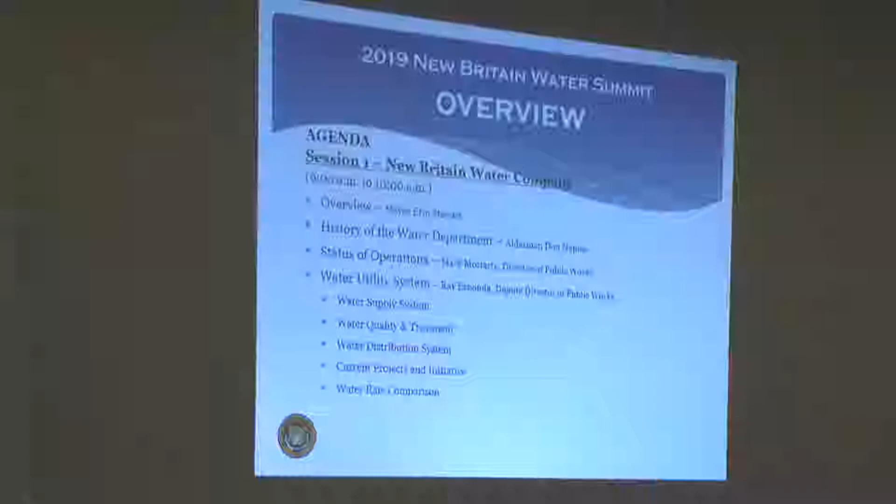I'm going to quickly hand this over to Alderman Don Naples. He's going to talk about the history of New Britain Water. The agenda today consists of Don Naples talking about history first, then I'll give a brief status about where the department's at right now, and Director Ray Esponda will go through and talk about the water asset—our distribution system, our water supply, the whole comprehensive water asset. Second part of the agenda, I'll talk about the sanitary sewer system, briefly hit on the storm system, and then Michelle Ryan from Mattabesset will talk about the Mattabesset District. There's probably a misconception that New Britain Water is just New Britain Water—it's actually New Britain Water Sewer, and they handle all of the city's underground utilities. So with that, I'm going to turn it over to Alderman Naples.

Thank you, Mark. Hope everybody can see what's going on here. We just set this up a little different.

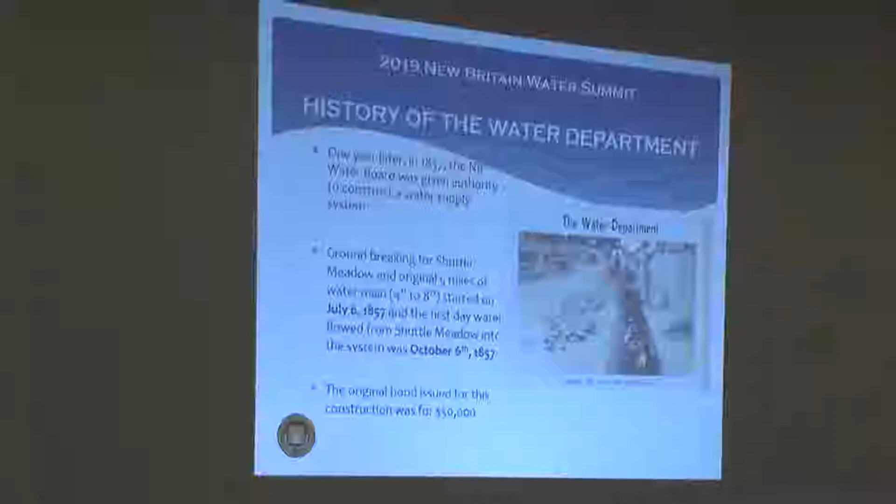The water department goes back to 1856. Our first mayor, Frederick T. Stanley, had a study performed about the feasibility of securing a water supply for the city. One year later, the water board was given authority to construct a water supply system, and the groundbreaking for Shuttle Meadow and the original 5 miles of water main happened in 1857, the next year. The first day water flowed from Shuttle Meadow into the system was October 6th, and notably the original bond issue for this construction was $50,000—keep that number in mind. It was 1857; that was a lot of money back then.

So the water department was founded in 1857. The town population at the time was 4,500, and in 1868 was the first reported water shortage because of rapid population growth. By 1910, the population was already up to 43,916.

In 1891, a new dam added 10 feet of height to the Shuttle Meadow Reservoir, bringing its capacity to 1 billion gallons. Then in 1910, it was raised another 4 feet, up to 1.1 billion gallons, where it is today.

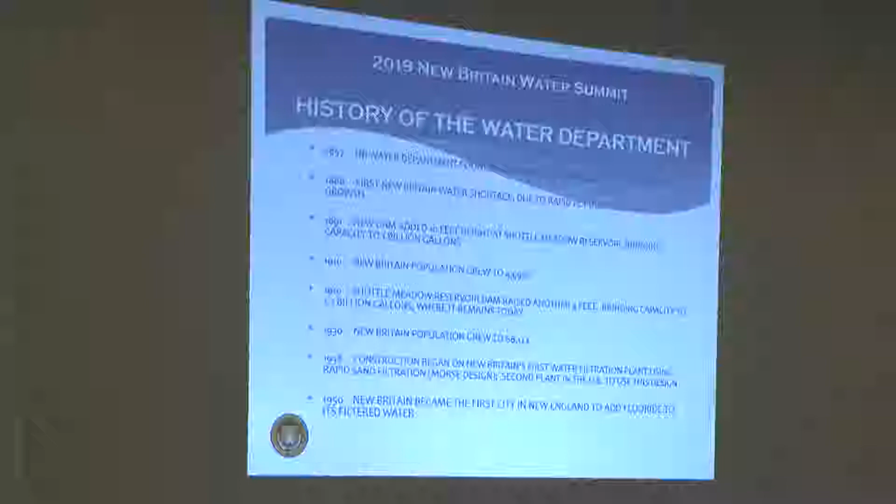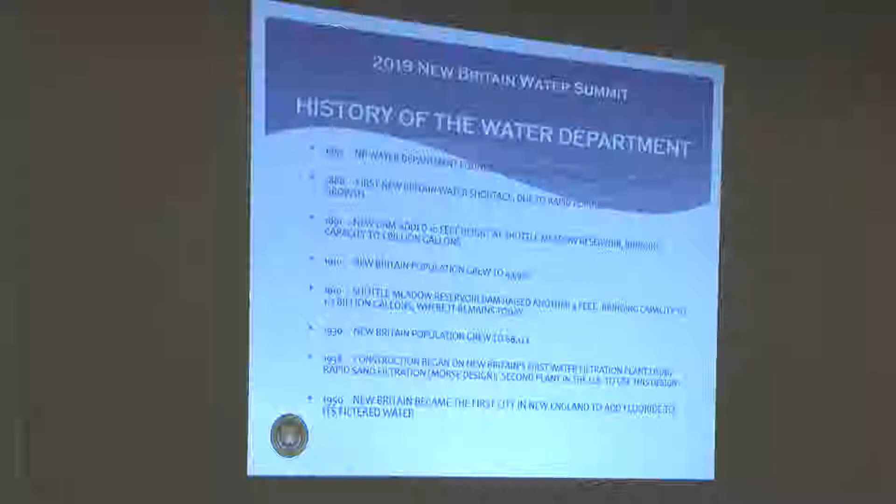And that particular day, big day in my life, because it was August 19th, 1938, and that's the day I was born. So my father, who was working for the water department, apparently didn't show up for that picture that day. He came to work right out of college in 1929 and finished up running the department in 1969, 40 years. So I got a little family. I think that's why I was asked to do this.

But that filter plant, I remember the only place they could find the fine sand they needed was from Cape May, New Jersey. They had to truck it up here whenever they needed it. 30 years later, I was in the Coast Guard. I was stationed in Cape May and learned a lot about that fine sand because it's so fine it gets in everything. It gets in your car, in your house, in your teeth. But there was no sand like that, and it was very good for this application.

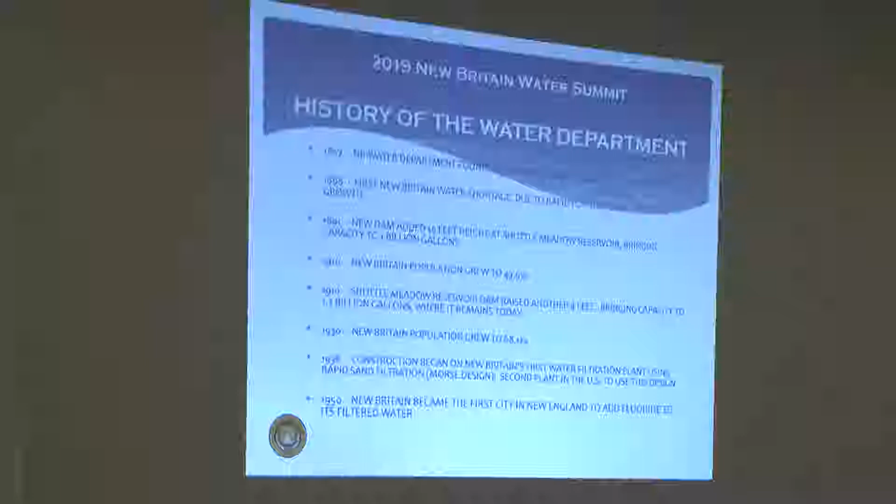So in 1950, another big event happened. New Britain was the first municipality in New England that added fluoride to its water. And there was no vote on it. There was some controversy at the time. The New Britain health inspector had been reading about people in the southeast U.S. They had fewer cavities there. It was because the natural water that they drank had natural fluoride in it.

So the group got together and decided, yeah, that would be a good thing to do. We'll put 1 part per million in. Now it's a big deal whenever anybody wants to do anything. But New Britain was first in New England, and the local history room sent me an article that was in the Hartford Courant chiding Hartford for not being progressive like New Britain was.

So in 1960, our population was up to 82,000. Population kind of floats through here. We got to 95,000 in the mid-60s, and we're at 73,000 today. So that has a lot to do, that and the factories, with what we use. So in 1961, there was another filter plant section added, the B plant. And so our total filtration capacity went up to 25 million gallons a day.

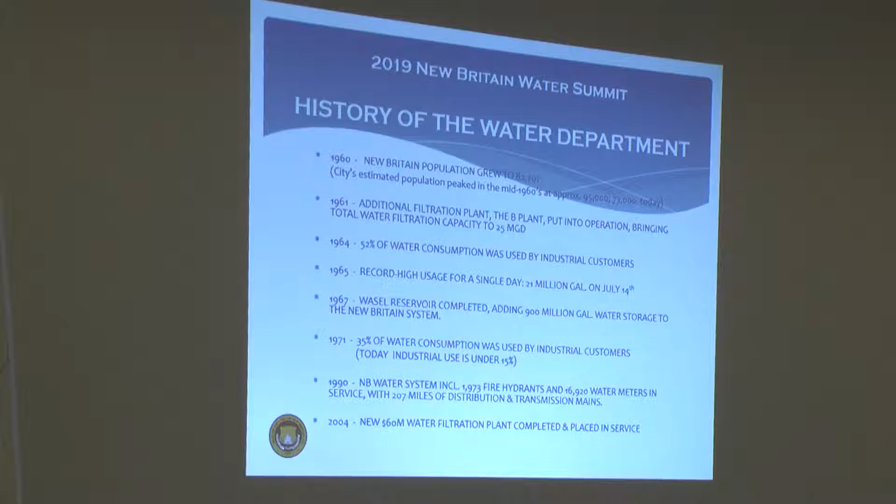2004, a new $60 million water filtration plant went in. Remember the original one was $50,000. My dad said that had a life of 50 years, so it lasted 66 years, which was pretty good.

Interesting fact, the Wasel Reservoir was named for New Britain native David Wasel. He was a Navy submariner who, when the Thresher went down, was lost along with the whole crew in 1963. Until then, the original name of the reservoir was Panther Swamp, so this is a lot better. Nice name. It's a better name now. Yeah.

Should mention back on the fluoride thing, I didn't have any cavities until I left to go to college, and then got 4 in the 4 years that I was there. So this is it for me, and I did it in under 10 minutes.

You did a good job, Don. Yeah.

Okay, I'm just going to get you up to date on where we are as a department right now. Don's presentation ended pretty much in the history of the water department in 2004 when the treatment plant was done. I have a little bit of history in the past few years since then.

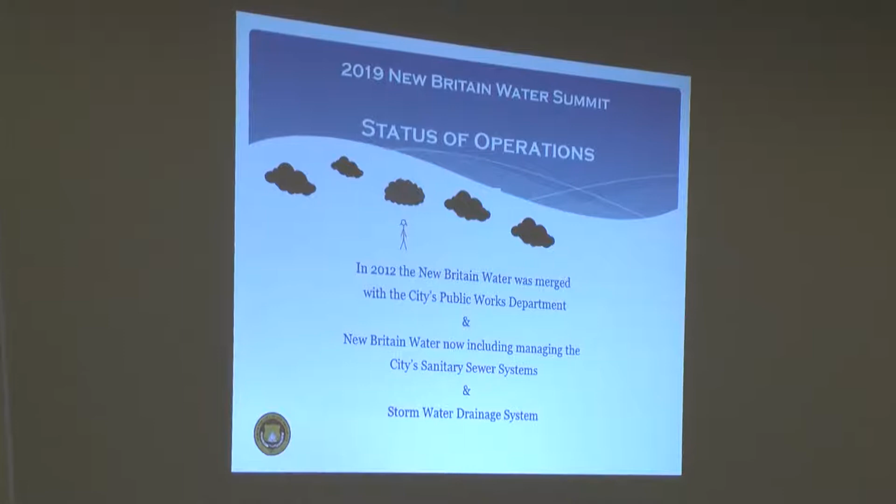For the first 155 years of its operation, New Britain Water was moving along just fine, doing a good job. They had just built a treatment plant. 2012 got thrown a little bit of a kink. Ray and some of his guys might say it was a black cloud day in New Britain Water, but it's actually been a very productive thing, a great thing for the city because we achieved a lot of savings by merging operations.

In 2012, we merged all of our utility operations under New Britain Water. Our sanitary sewer system and our storm water drainage system, all the staff and equipment that went along with that, came into New Britain Water. It was a good move because under public works, sanitary sewer was just managed as one of our functions, but New Britain Water really manages underground utilities. So it was a smart move, and it's one we continue to make progress on.

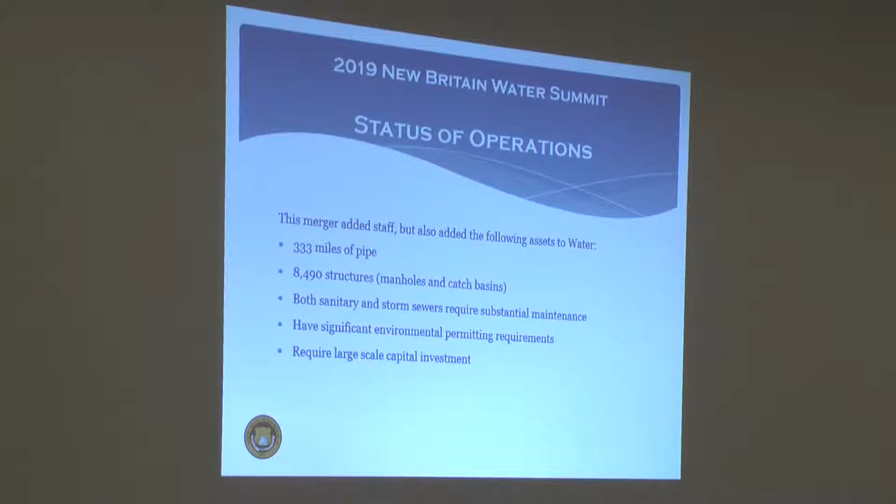This meant a few things for New Britain Water: added 333 miles of pipe under their management, and almost 8,500 structures between manholes and catch basins were added for them to oversee. Both water and sewer utilities have heavy permitting requirements, a lot of deep permitting and work we have to do just for compliance. Especially on the sanitary sewer side, there's massive capital investment required, which I'll get into more in the second half of this presentation. Sanitary sewer has a lot of capital projects to do.

It's been successful to date. Ray and I are joined at the hip. I spend more time with Ray than my kids or my girlfriend. For all the time we spent together, I'd say we generally like each other.

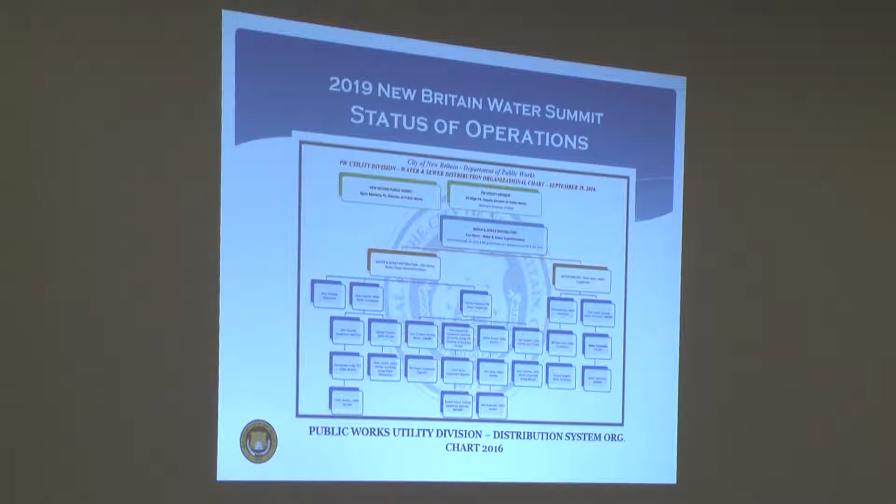When New Britain Water first came into public works, it was actually a pretty easy task for me. It came with a full management team, Gil Bly was there, so it didn't really require a heavy lift on my part. Then 2016 happened. Going into 2016, the org chart was pretty solid.

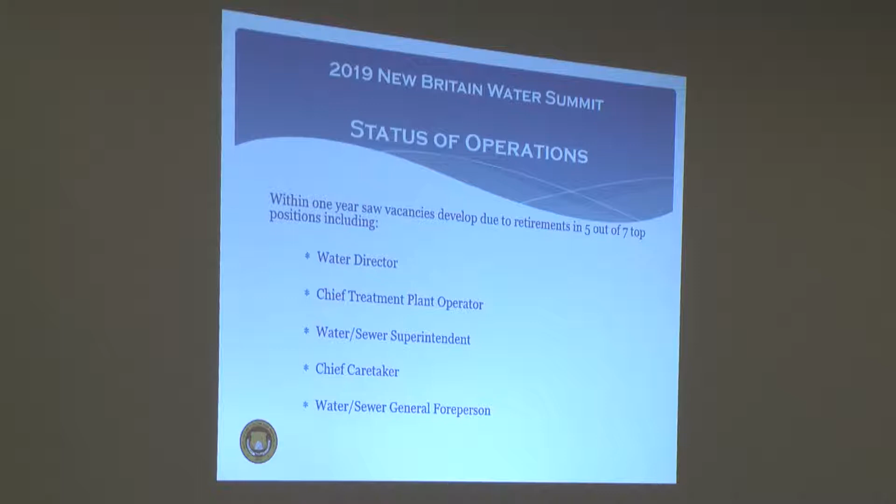Within that year, we lost 3 of the top positions in utility operations, on the distribution side and the water quality side, by the beginning of 2017. Similarly, we lost a number of our top positions during the course of 2016. Overall, in 2016, 5 of the top 7 people were lost through retirement: the water director, Gil Bly, our chief treatment plant operator, water sewer superintendent, chief caretaker, and water sewer general foreperson. We lost basically all of our people.

And we did this at a time in 2016 when we were faced with the worst drought since 1960 - Shuttle Meadow Reservoir was at 20%. At the same time, on the sewer side, we were faced with a consent order from EPA that we had to negotiate. It's a CMOM order, basically, and it spoke to how we had to manage our sewer and the investment we had to put into it moving forward. These were probably the 2 most difficult things we'd faced in years on either the water or sewer side, and we were doing so with 5 of our top 7 people gone.

Fast forward a few years, I gotta say, we not only got through those things, we negotiated the CMOM order favorably, which was a difficult thing to do. We got through the drought, and thankfully the weather turned around. This year has actually been one of the wettest on record, and we've been operating pretty close to 100% for quite a while now.

Our new leadership team at Water consists of Ray Esponda as the lead - he's Deputy Director of Public Works and runs the water and sewer operations. James Richardson is Chief Treatment Plant Operator, sorry about the typo there. Chris Bolkowski has been in charge as Superintendent of Water Sewer.

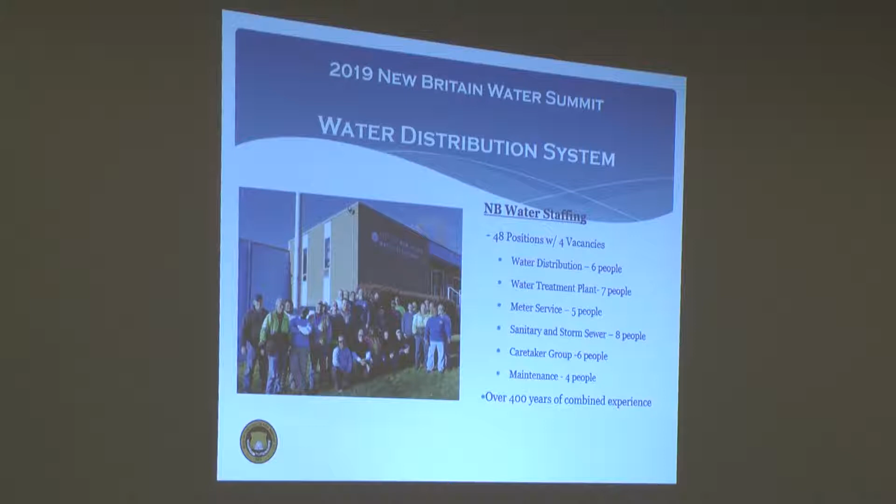The good thing about the reorganization, what it brought together, is it gives more people - when you have an emergency, like a water main break, we can draw from sewer guys, we can draw from water guys. They can work together, and they all have experience doing this now.

The rest of the presentation, Ray's going to get into our water asset, the distribution system. We have a great map over here about our water supply. This map really covers everything, but it covers our water supply system.

We're going to try not to get too in the weeds. This is technical stuff, it's water. We're going to try to keep it high level and informative for you. Some of it gets a little technical when talking about water treatment plant operations, so bear with us if we get technical. Ray does a hell of a job keeping things entertaining and moving along, so you're not going to have to worry too much about that.

Okay, Ray. Thank you, Mark. Mark, it has been a pleasure working with you for the last 2 years. And you can pay me later.

I've been here since the construction of the plant. I started in 2001. When I first got here, Gil Bly interviewed me and refused to show me the old plant - that's how bad it was. It had gone 16 years past its useful life.

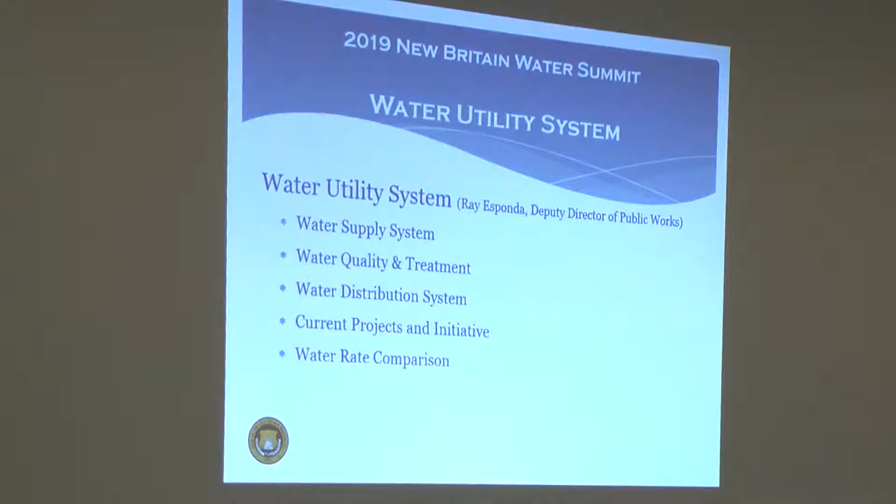But I've been blessed to work with the foresight of the prior overseers of the water department. There were some really brilliant people at one time. They made some great decisions - buying the land, locating the plant, putting the assets where they needed to be. Fantastic work. I actually stand on the shoulders of giants.

Don's father did some incredible work. Getting the Wassel construction done, it was amazing.

So I'm going to just go over the basic water utility system. I'm going to go over the supply system, quality and treatment, which is my forte. We're going to discuss the distribution system, some current projects and initiatives, and of course we're going to talk about our rates as compared to others in the area.

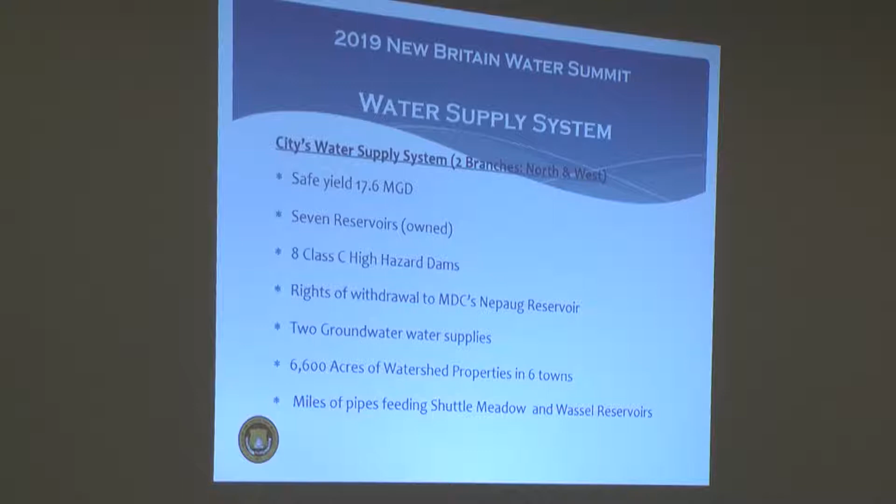All right, the city's water supply has a safe yield of about 17.6 million gallons a day. That's the water we can get from our reservoirs. We have 7 reservoirs. The furthest one away is the Whigville Reservoir. We have the Wolcott Reservoir.

We also have the rights, which I had to utilize for the first time since the 1960s, to withdraw water from the Nepaug Reservoir, which is owned by the MDC, all the way up here. That pipeline is our system. We have 2 branches of supply: the Western system, which comes from Wolcott all the way to Wassel, and the Northern system, which goes from Nepaug to Whigville all the way to Shuttle Meadow. From these 2 reservoirs, we draw water into our treatment plant.

We also have 2 groundwater supplies, and the future for the New Britain Water Department is those groundwater supplies. We have the Patton Brook, which we just got back from Southington about 3 years ago, and we have plans in place to utilize it. The first time that water actually came to New Britain was about 1.5 years ago. We reconnected it to our system, and we were able to draw limitedly into our Shuttle Meadow Reservoir. It's connected to our Western system, but because of the aging pump and the way it was originally designed, it was intended to go into Shuttle Meadow, not into Wassel. The pumps aren't set right, and we have to do some work out there.

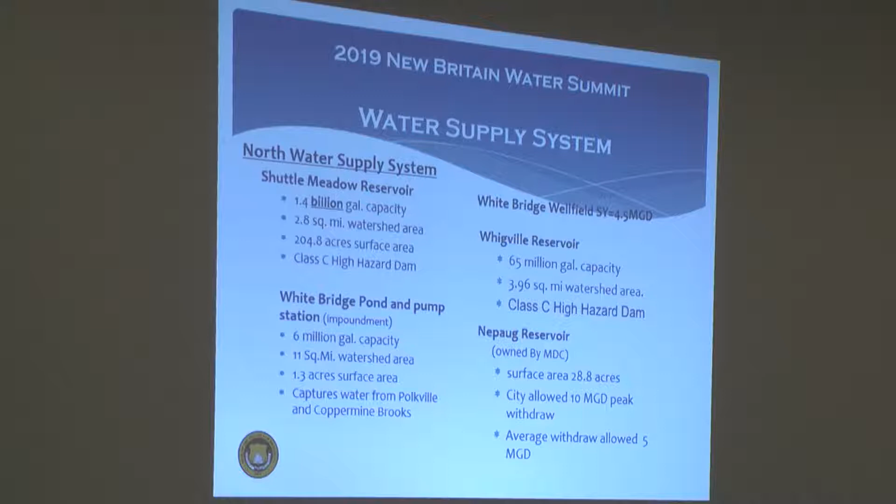Okay, our northern supply consists of the Shuttle Meadow Reservoir, which is our largest, with a huge capacity, 1.4 billion gallons. We also have the Whigville Reservoir, which is up here, a tiny reservoir in an incredibly large watershed. If you looked at it from a map, it's almost like looking at a thimble inside of a blanket. Incredibly large watershed. We also have the White Bridge Pond and Pump Station. We have a pond where we get surface water, but we also have 32 wells out there, very old wells that really need to be redeveloped. And we're working right now on a study to see if we can actually make that a potable water supply.

Then we have our Western system. Our Western system consists of the Wasel Reservoir, which is almost 1 billion gallons. The major concern with the Wasel Reservoir is that it's a great storage reservoir, but it doesn't have a lot of watershed on its own. So it's really dependent on the Hart's ponds, which would have to be pumped to that reservoir, which can be quite expensive. But we do have the Wolcott Reservoir, which was originally intended to fill Shuttle Meadow, but back in the 60s, we created a new pipeline to feed the Wasel Reservoir from that. And now we have the addition of the Patton Brook well, but again, limited use of it. I can take the Patton Brook well and pump it to Shuttle Meadow and get 1 million gallons a day. But if I pump it to Wassel, I get less than half of that. It needs to be worked on significantly.

This is our treatment scheme. Our new treatment plant was built in 2004 and put online. I came in 2001 to help oversee the construction of it and make sure that the chemistry would work properly. We can take water directly into this plant from Whigville if we need to, but being a small reservoir with such a large watershed, the water quality, the term that we use in the water treatment business, is flashy. On a nice steady day without any rain, the water quality is good, but if we start getting rain out there, being such a large watershed, the water quality drops significantly. We can also take our water directly by gravity from the Wasel Reservoir, and we pump it from the Shuttle Meadow Reservoir into this building.

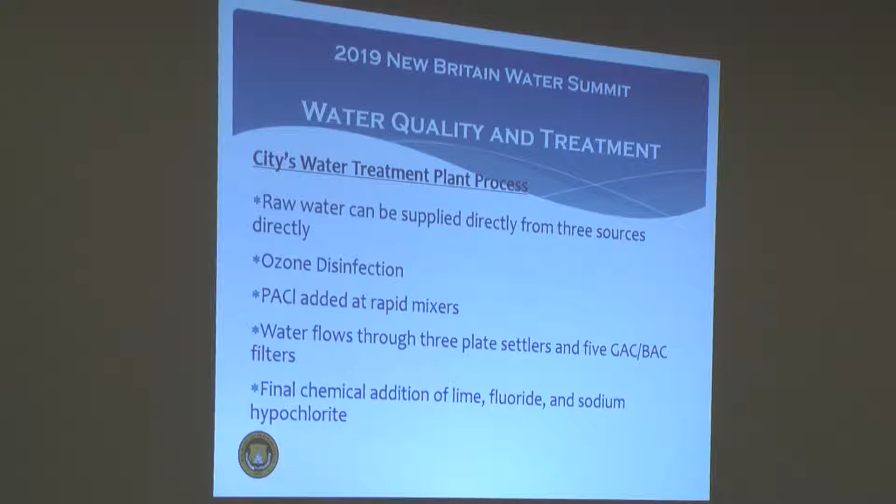And then we use sodium hypochlorite, which is chlorine, to maintain that our distribution system is free from any sort of contamination by bacteria or viruses or any protozoa. This is a basic scheme of our plant. We have the 3 sources that come in. We hit it with ozone, and then we clarify the water by adding that coagulant. It goes through our flocculation, then through our plate settlers, and then it gets filtered out.

And on the way out, we hit it with lime, with fluoride, sodium hypochlorite. We have the ability to add carbon dioxide. Because we ran into some issues when the plant was put on, we've eliminated that, and we use a high pH scheme to control our corrosion.

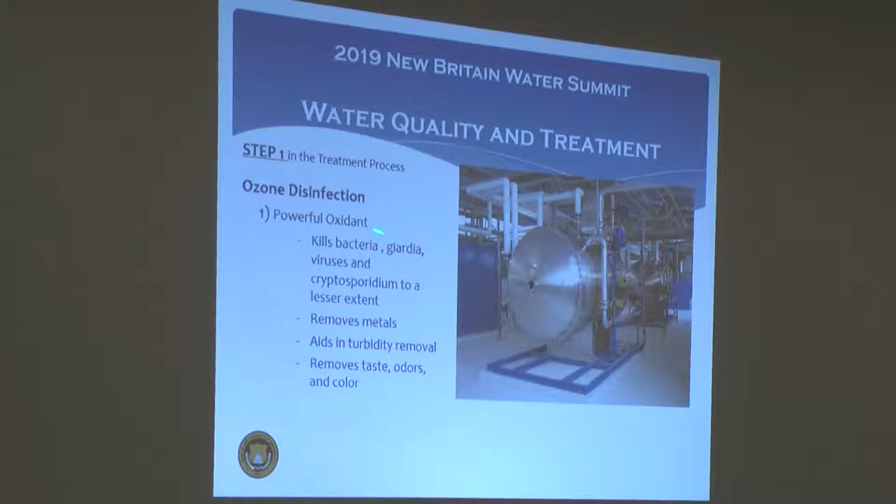This is an ozone generator. Very expensive piece of equipment, but it gives us some great ability at this treatment plant. Not only does it kill bacteria, giardia, and other protozoa, it controls cryptosporidium. Cryptosporidium in the 1990s was responsible for the Milwaukee outbreak, where 400,000 people got sick. Almost the entire population of Milwaukee got sick because of cryptosporidium. And with that occurring, there was a whole new set of laws that came through.

One of the other benefits of ozone is it oxidizes metal. It's oxygen. It's basically oxygen. And it also helps in our turbidity removal, and it does bleach out taste and odor compounds and color compounds. So it's a really interesting and powerful chemical that we use. Again, our GAC is a very interesting process.

We use this media, and this media is fantastic because it can actually absorb organic pollutants from the water as the water is being filtered. This is a typical scheme of one of our filters, but these are the tiny granules of media in there, and all these fissures and cracks act as places to attract contaminants. 1 pound of activated carbon basically has about 200 miles of surface area, which we can attract all these

organic contaminants. They help remove VOCs, which are volatile organics, mostly like gasoline, toluene, things of that nature. It also removes SOCs, which are synthetic organics, pesticides and herbicides. So this is a really important step in our process. It also removes taste and odor compounds, which are also organic for the most part.

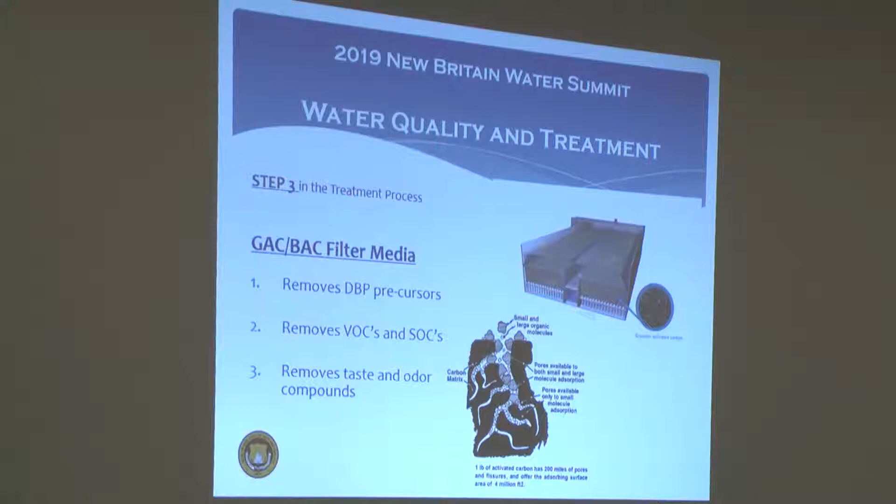We use a liquid. One of the changes that we went to when we had the new plant put online, we went from a gaseous chlorine system where we had these massive 2-ton cylinders of chlorine gas, which were quite dangerous. If we had a leak with one of those, we could have big problems. So we switched over to a liquid system, liquid bleach. It's safer to use, it's easy to use, and it provides a really good disinfectant.

The other thing that we changed, we went from aluminum sulfate to polyaluminum chloride, which was at the time a new type of coagulant. Uses a lot less alkalinity, so we don't have to add chemicals at the front of the process. It works over a much greater pH range. It also works well in cold temperatures. One of the biggest problems that we had with working with aluminum sulfate was in the winter. We couldn't get a good floc formed, but we now can avoid that. And we don't need to add any other sort of polymers to help with the process.

Our final steps are we add lime. And what we're trying to do here, because of our aging infrastructure, is we're trying to produce this coating here. This is much more exaggerated than what we actually do. But what we do is we build a scale between the pipe and the water. And we build a protective barrier to keep the water as safe as possible from the actual metals in the pipes. And that could be anything from iron, galvanized steel, lead. So we're trying to separate that.

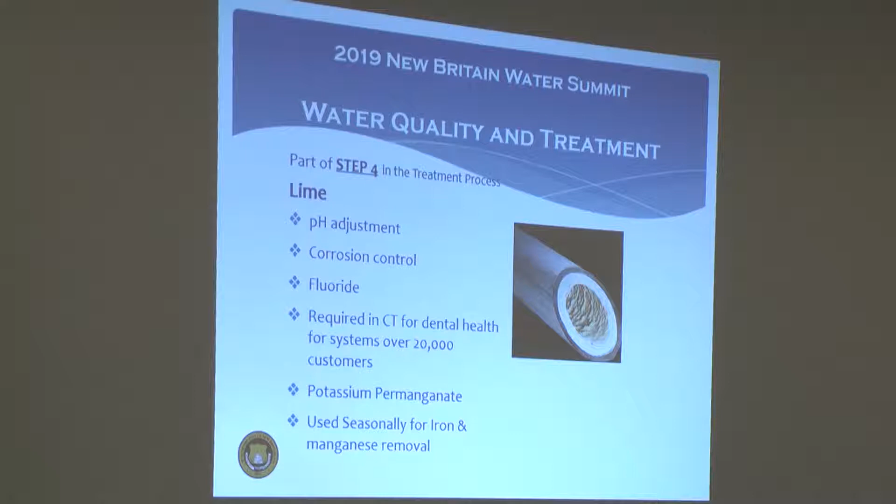And that just removes iron and manganese from the water. So basically, a simple process when you look at it overall, but the devil's in the details. It is quite complicated to operate.

This is our distribution system. As you can see over here and in this map, we have different areas of concern. We have 274 miles of water main. I didn't know it was that high when I first got this information. We have over 2,000 hydrants. The pipes in our systems range from 30 inches to 4 inches. Some of our pipes go back to the original 1860 pipes.

You know, it's great to have this stuff, and it's again a marvel that they're still there, and some great engineering work was done, but you just built a very new state-of-the-art treatment plant, and you're putting it into a 150-year-old pipe. So there's some issues. We also have 3 water storage tanks, which were all built since I've been here.

We have 4 pump stations, which we're working on, and these are just in the distribution system to service our high service area, which is red areas down here, and then we have our low service area, and you can see them better here. We have our high service area, which is served by the Corbin Avenue pump station, and I'll go into the details there. And then we have a smaller Steele Street area.

Right now, we're serving approximately 85,000 people. Even though the population in New Britain is less, we do serve Kensington, Berlin, and we actually supply some water as far as Bristol, Connecticut. Okay? And we have approximately 18,000. It's more like 17,700 customers, service connections.

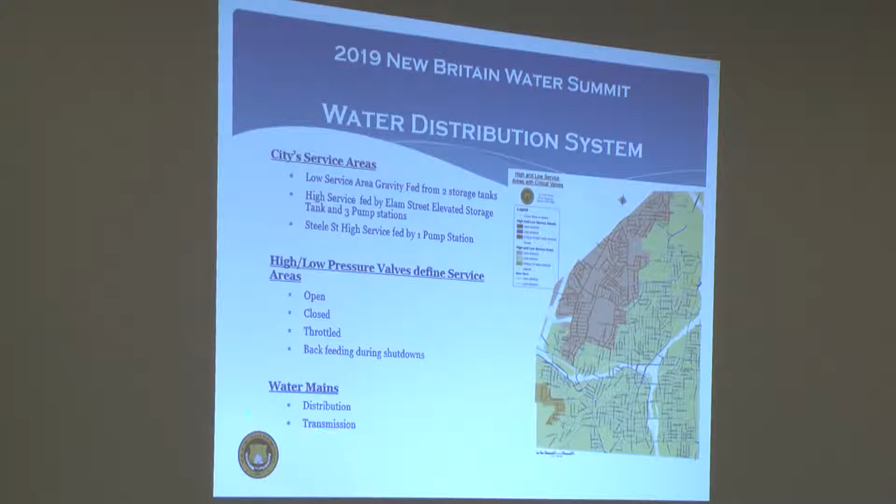This was our clear well, and it's the one that's right outside of our treatment plant. Its capacity is 4.25 million gallons. This is a really important step before the water gets into the distribution system. This is our contact time. This is where we add our chlorine and it allows the water and the chlorine to mix and provide the security that we need to make sure that that water is disinfected.

And we also maintain a chlorine residual that goes into the distribution system and keeps it free from bacteria and viruses. The design is very interesting because if that ever went down, we'd have a problem. So it's a tank within a tank. So we can isolate one half of the tank from the other, maintain one while keeping the other one in service.

This is the Elam Street Low Service Tank. This was just put online in 2015. It provides 2 million gallons of capacity. It was reduced from its original tank, which was 4 million gallons, but we have issues with water age. We wanted the water to be as fresh as possible, and when water gets old, and you have some organics in there, which is natural, and you mix it with chlorine, we get a chemical that's very problematic. It's called a disinfection byproduct. And by reducing the amount of water age, we lower the potential of that forming.

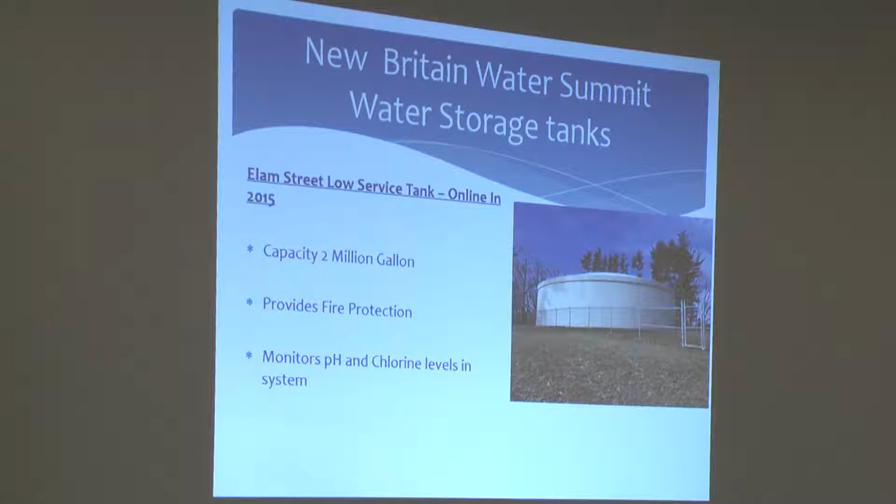We beat it with a wrecking ball until it finally gave way. But it was limited in capacity. It was a standpipe as opposed to elevated storage. Imagine just a pipe about this size, just full of water. And it only provided pressure as high as the water rose.

By putting it all on elevated storage, now we have 1 million gallons of water all at the same pressure at a higher elevation. Water-related pressure is dependent on the elevation where it's coming from. It also gave us an opportunity to help the other parts of the city. We put a communications antenna up there, and we have better radio communication throughout the city.

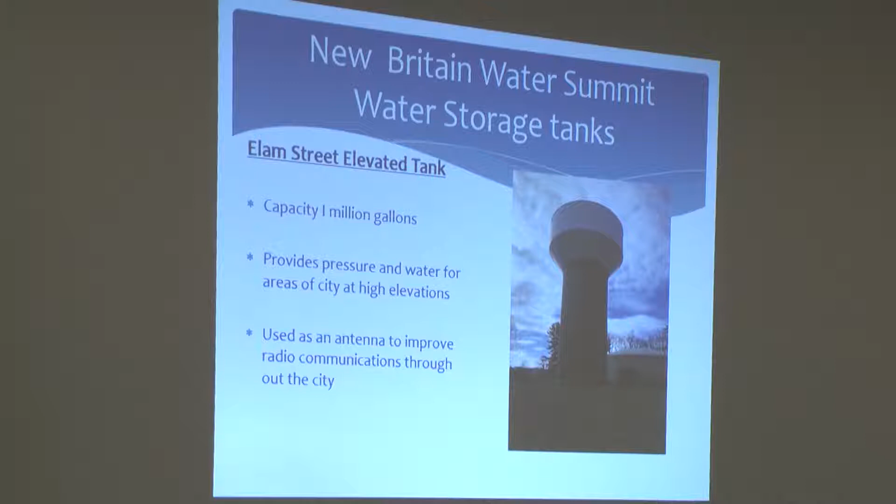In 2015, we also modernized our Corbin Avenue pump station. Its pumping capacity is over 4 million gallons a day. We modernized it. We put variable frequency drives, which basically allow the pumps to run at varying speeds as opposed to being either full on or off.

We included a new generator, so if something happens, we know we've been having a lot of storms recently, we have a generator that can operate that plant and provide water throughout the system. Again, we added those variable frequency drives, which allows much more efficiency.

We automated the plant. We have SCADA there now, which is supervisory control and data acquisition. Basically, we can operate that pump station from this building or any other one of our facilities that has SCADA capabilities. And recently, we have just finished completing all the new pumps that were in there. So we're constantly moving forward.

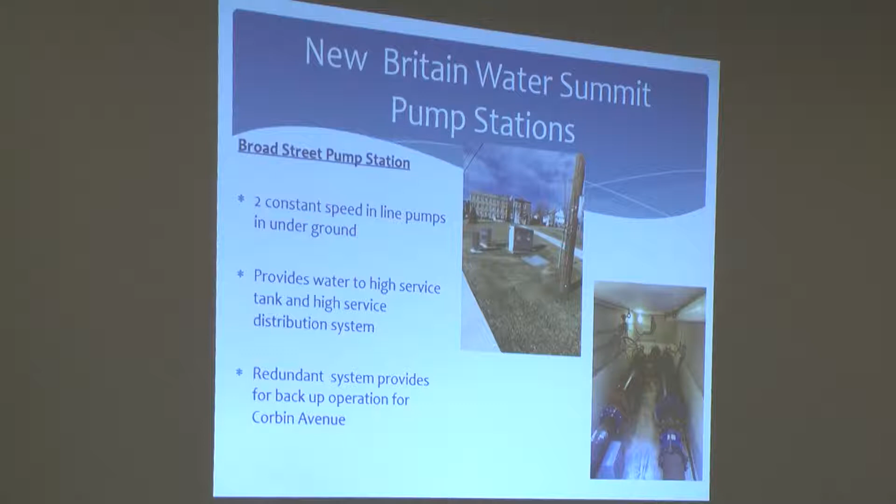And again, constant speed, because it's much cheaper to run at one speed than it is to vary, but not as overall efficient. Again, it provides water to the high service area, and it can fill the tank, which is quite good. And again, it allows for that redundancy in operation, so if something ever had to be done to Corbin Avenue, we still have a backup to provide water to the high service area.

And finally, we have one of our oldest pump stations. This was built in the 1930s, and what it actually did was connect the old high service and low service tanks. So we could take water from the low service tank and pump it into the high service tank. Limited capacity, about 500 gallons per minute. Again, it's 2 constant speed pumps.

We did some work in upgrading the monitoring systems up there, and we also put a connection to a generator. We could bring a portable generator out there and operate this during storm situations. Again, it is used to provide water to the high service area, but it really connects the low service tank to the high service tank.

So we've changed the operation scheme there, and we have a constant speed pump station. We've gotten rid of the tank, and we've actually just got the design plans to make this much more efficient, and we'll be doing that in the real near future. It's going to provide a lot better service for the area.

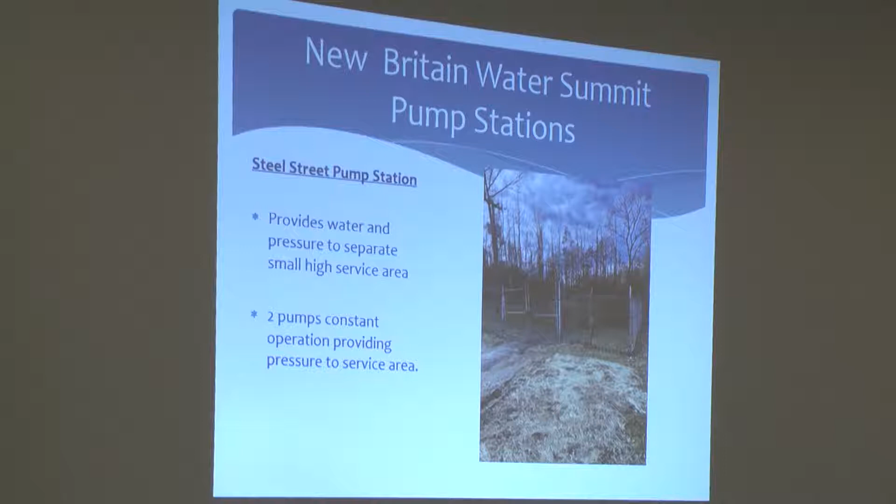One of the issues that we had here was because it had a tank, the pressure would rise and drop depending on the water level in that tank. And it was a small tank, only had about 2,000 gallons, but a lot of pressure because of the air that was required to push the water out.

Sorry, let me get back here. Did I go back here?

The water crew does a lot of different things. We install water mains, replace hydrants, do water services, cuts and repairs. We pressure test throughout the system, usually required by builders. We disinfect water mains, help contractors, and also provide a lot of our services to neighboring towns like Berlin. We respond to emergencies and do our annual maintenance.

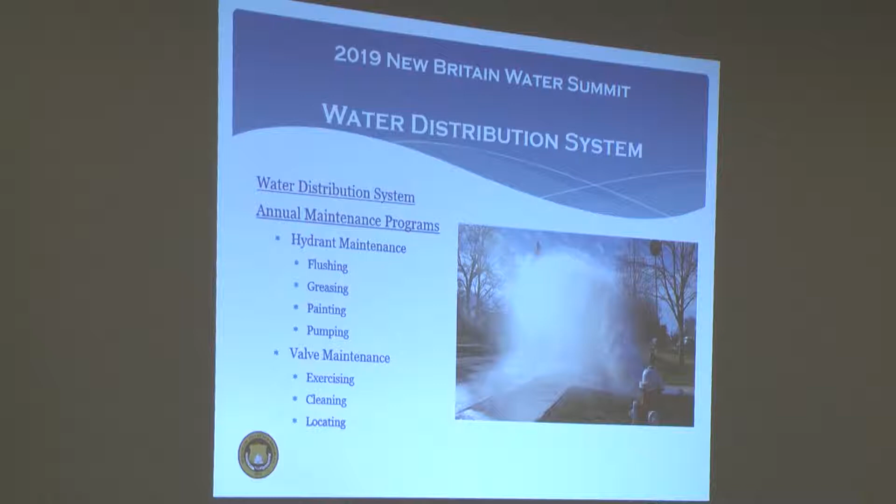Annual maintenance is something that has to be done, you can't stop that. That includes flushing our distribution system. We maintain our hydrants — flush them, grease them, paint them, pump them out. We do valve maintenance, constantly opening, checking, and closing valves to make sure they're operational. We clean them and locate them. Sometimes we'll find a valve nobody knew about, a 100-year-old valve.

We left the police department without water. One of the tragedies was we had to close the dialysis center because it flooded. It was an 8-inch distribution main connected right out of our 16-inch transmission main, so the water was flowing out incredibly. It was a 2-day repair, and this is what's amazing.

We did that all in-house with our own staff, our own people, for a cost of $25,000. This job, if we would have put it out to a contractor, would have probably cost 8 times as much. That pipe was a 1975 pipe. We were able to put the road back in service in less than 2 days.

Very proud moment in my life here. I can't say enough about what my crew did, what Dave Gominas — raise your hand, Dave — did. Dave was the leader on that job. We did something that was incredibly good. Thank you, Dave.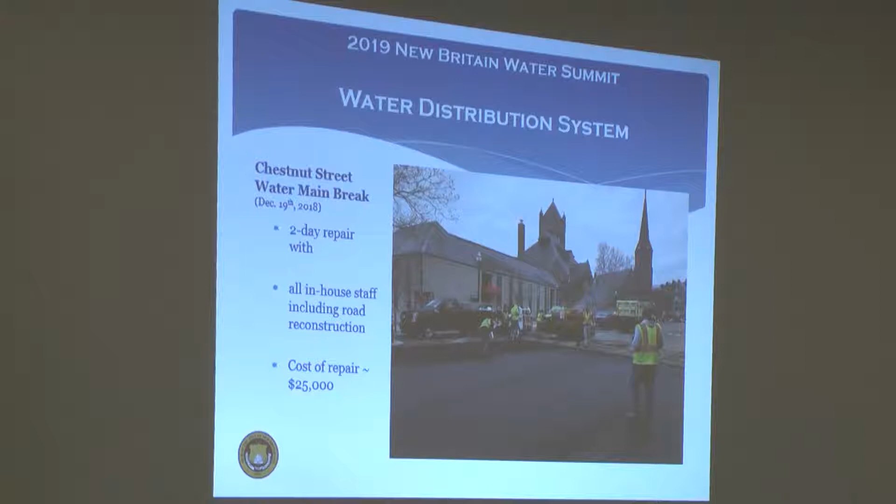Again, this pipe was dated to 1892. The reason we found that out is when we looked at the original pipe, it said 1892 — it was forged in 1892. Amazing, lasted 100 years. Well, one of the most important parts of the distribution system is the meter system.

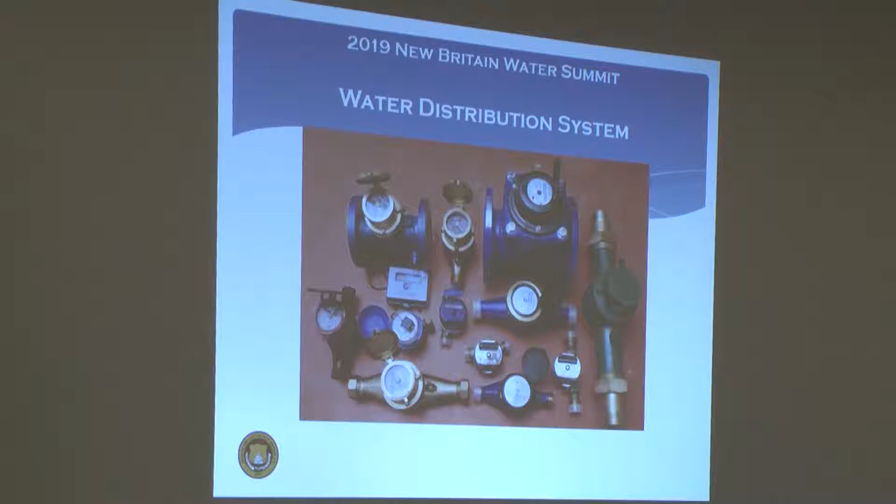This is our cash box — this is how we make our money. This is also what led me to do some things we'll talk about in a few minutes. But meters are really important, and we have a great meter crew.

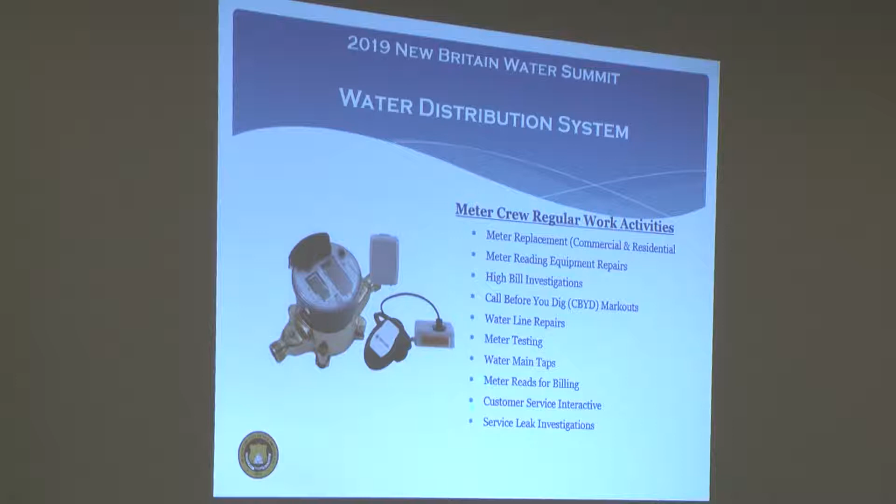One of the initiatives we've done in the last 20 years is we've almost gotten rid of all our hand-read meters, and we do it by radio frequency now. The meter crew does a lot of different things — meter replacements, high bill investigations, all the markouts for other utilities, call-before-you-dig, and customer service investigations where we're looking for service leaks.

Which again, when we noticed the amount of water that we were producing from the treatment plant and how much we were billing through our meter system, we realized that we had a problem. So I ordered a water audit, and we found out that we had 1.4 million gallons a day leaking into the system. Again, that's related to our ancient distribution system. 1.4 million gallons a day, close to 500 million gallons of water being wasted a year.

Okay, right now we've done a lot of the work, but when we did the work, we were able to identify that a lot of these problems were from service connections, which is the responsibility of the homeowner. We had water main breaks, valve leaks, and hydrant leaks, which is our responsibility, and we're taking care of that. But we found over 110 leaks throughout the entire system. To date, we've repaired about 500,000 gallons of those leaks.

Currently, we're in the process of addressing the leaks with private service landowners, the homeowners, and we've been telling people for years to buy the water service line insurance. If they have that, that'll cover the cost of this. If not, it's going to be anywhere between $3,000 or $5,000 per person, which is problematic, and we're trying to come up with a solution to help our residents. Again, the service insurance is really important. People should buy that. It's not only available for water, it's also available for the sewer system, because sewer laterals are also a problem. Our future, we're moving forward.

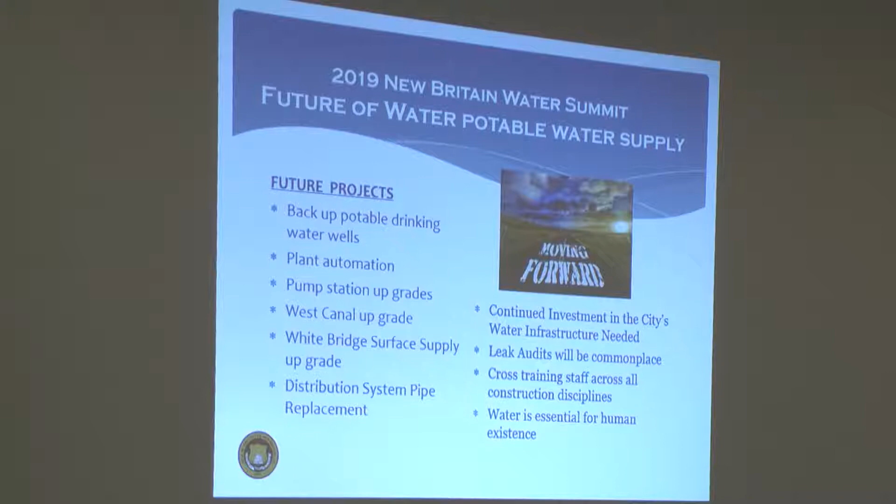This is some of the projects that we're working on right now. As I mentioned earlier, we have 8 high hazard dams. We're looking at doing some more work to our Whigville Dam. It is a dam, but because it doesn't have a structure, it's called a dike. And we're doing repairs on those. We just got them inspected.

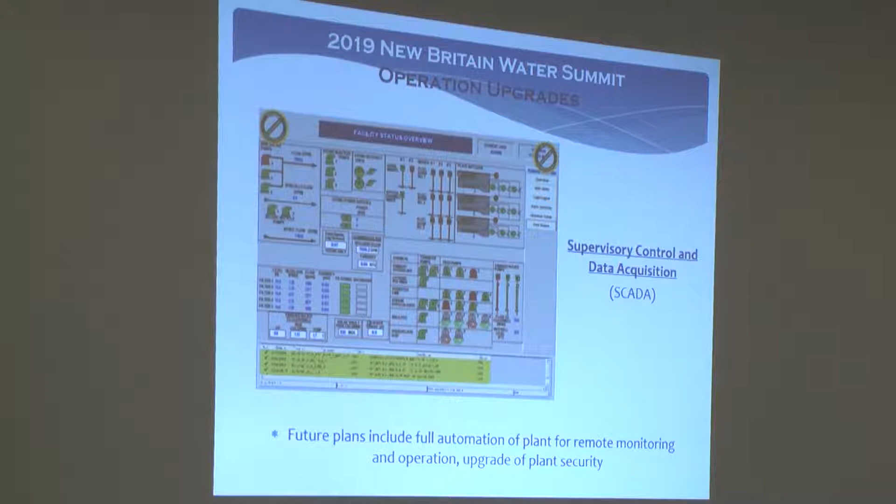What we had to do was identify the entire path and be able to notify everybody in its path if something were to happen. Again, this is the worst case scenario, and we do maintain our dams and put a lot of money into it. But we still had to make these plans.

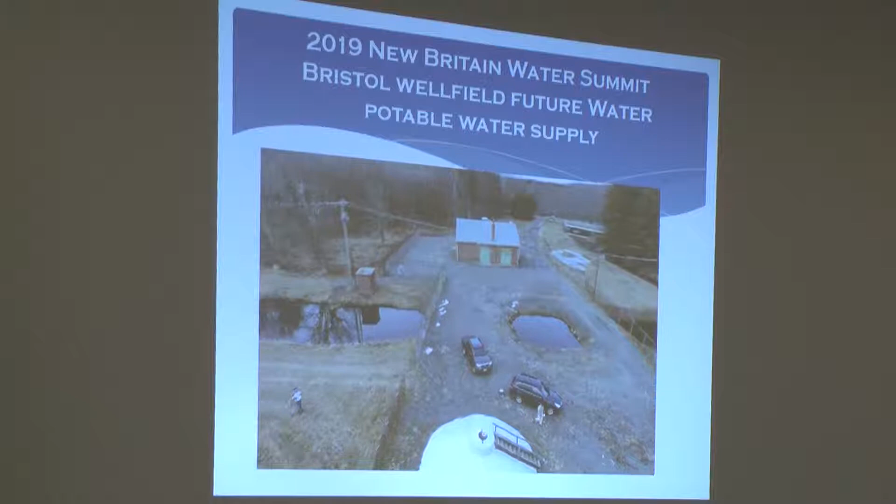This is the future of our system: the White Bridge well field. This was provided to me by CEI, the consultant we're working with, and this is what it is now. That pump station was built in 1923. It has a pond and a canal in the middle that connects two small brooks, the Pokeville Brook and the Coppermine Brook. Along the canal we have 32 wells, very shallow, with a vacuum suction system that goes back to the 1920s.

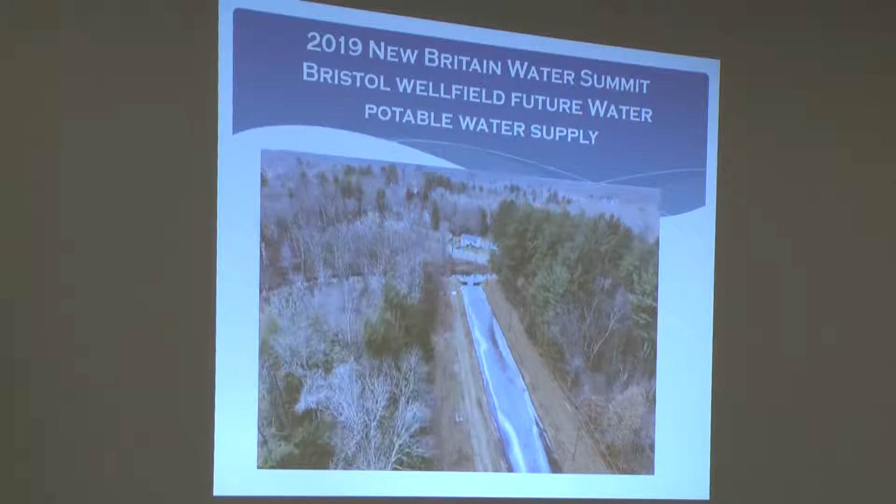We want to modernize this, put in new wells, make sure it's safe, and have this as our backup. It would also help us in our sales to Bristol. One of the crazy things we do is take water from Whigville, bring it here to New Britain, treat it, put it in a pipeline, and send it back to Bristol. If we build this, we could sell directly from there to Bristol, which is much more efficient. It also gives us the capability, if something happens to this plant, to survive with our own water chemistry so we wouldn't destroy our own distribution system.

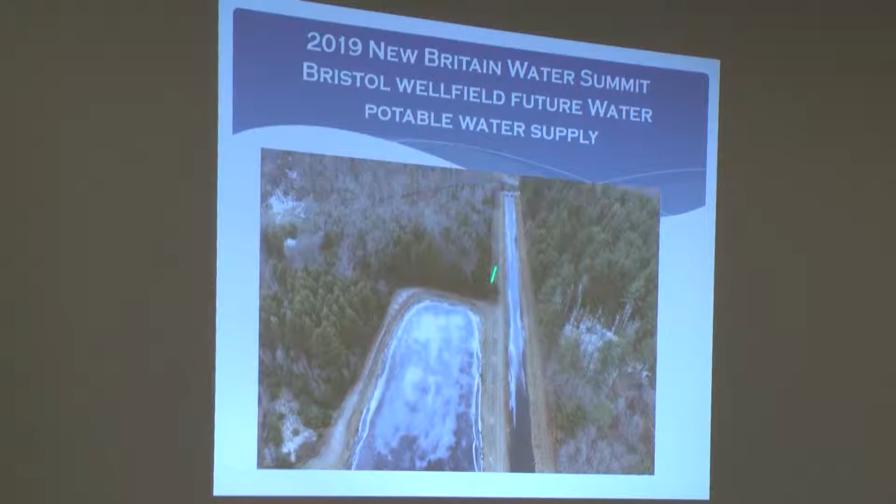Again, this is a nice view, and there are two well fields there. This is the lower well field where we have all these lines, and then there's an upper well field which has tremendous potential. The water up there can be incredible—I've been told the quantities up there can be quite substantial.

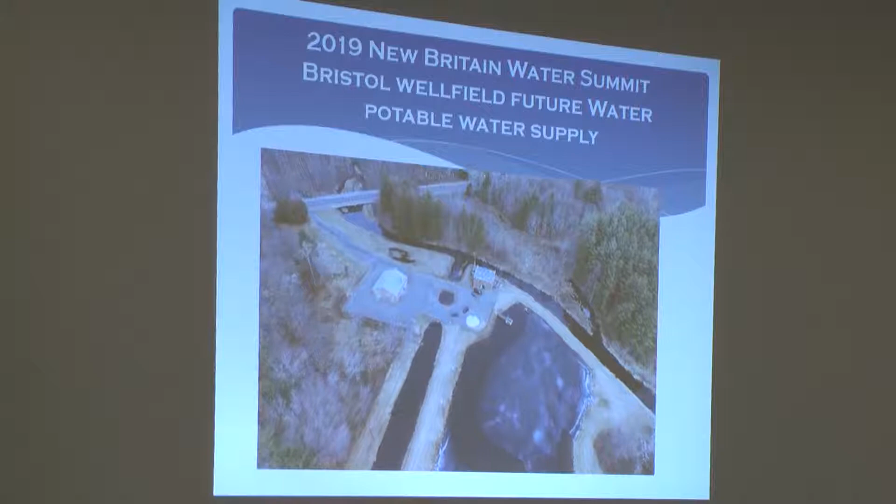This is an overview, and we're going to cross this road and go see our upper well field. You can see the Coppermine Brook—this was the one that was controversial the last couple of years. This is our upper well field; we have a small pump station, then two fields where we have three wells in each one. We want to build at least one well in each one of these.

This is property we own—it's a great resource. We want to just modernize up there. I cannot stress how important this is for our future as a water department. It will also give us the ability to grow if we need to. These are the well fields out here—a fantastic place.

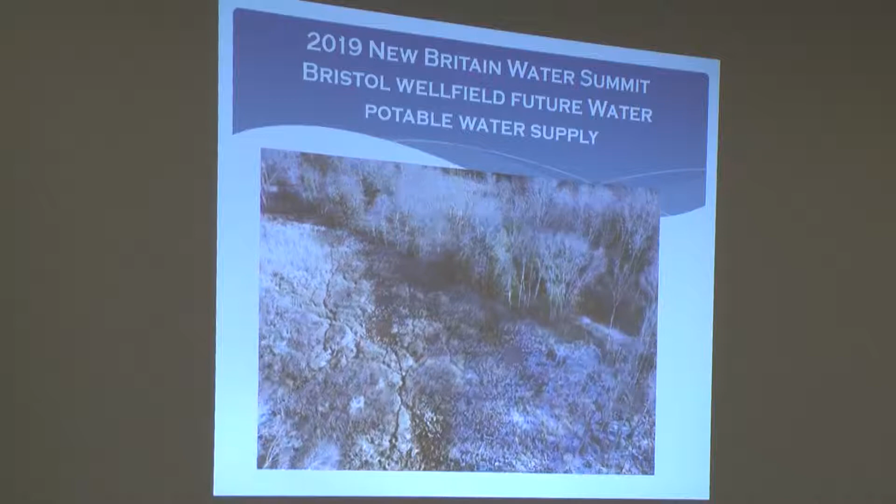The other project we're doing is eliminating some of the dead ends in our system. We're going to loop these to enhance water quality, and our first project planned is by Batterson Park. We're probably going to do this in-house with Dave's staff. We're trying to keep work in-house and do it on our own—it's better for us, so we can respond to emergencies, get our people trained, and it's cheaper and more efficient for the city.

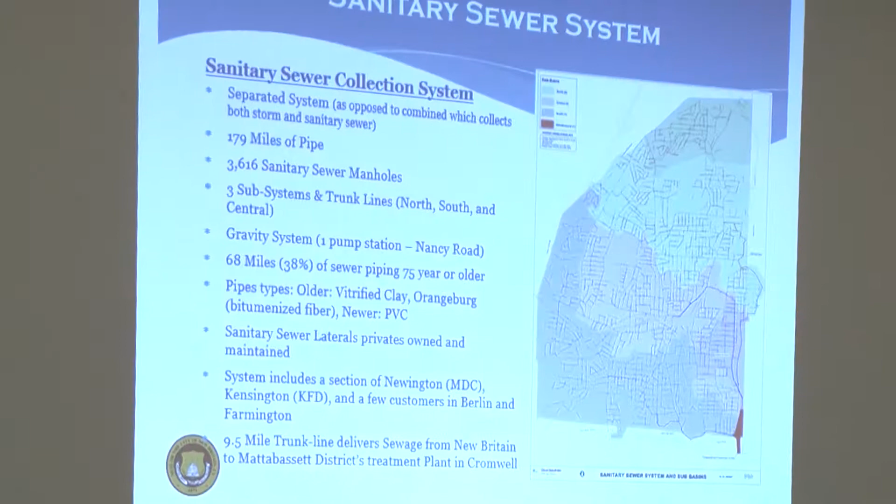I have a couple maps here. This one shows the sewer system. We have 179 miles of pipe and 3,600 manholes. An impressive thing about the system, something Ray also touched on with his system, is that it's almost entirely gravity fed.

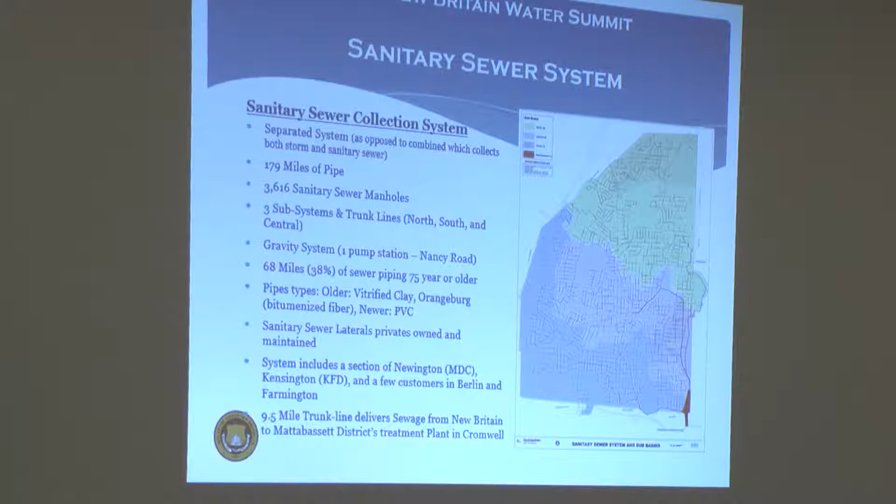New Britain's a hilly city - everywhere you go, you're pretty much going up or down. This map shows New Britain's sewer system well. Everything in the 3 major sub areas flows to 3 different trunk lines - one through the central part of the city, one through the southern part. They all merge together at the very southeast side of the city and travel 9.5 miles down to the Mattabassett treatment plant, all by gravity. What you don't want with any utility is to have to pump things. Gravity working on your side means there's no energy cost associated with it - that's a great thing about our system.

We have one pump station. Let me say a bit more about our system - our northern trunk sewer travels through a brief portion in Newington, picks up a little bit of Kensington, and just a couple properties in Farmington. Besides that, it is an old system - about 38% of our pipes in the ground are 75 years or older.

The thing about that is when you're buying a product, products always have a life. A lot of times people talk about how things were done better in the old days - but one thing that wasn't done better is sewer pipes weren't better in the old days. A sewer pipe put in the ground over 75 years ago probably had an initial design life of maybe 25 years, and it's been in the ground now for over 75 years. That's why, when I get into some of these other problems we have, that's a lot of the reason.

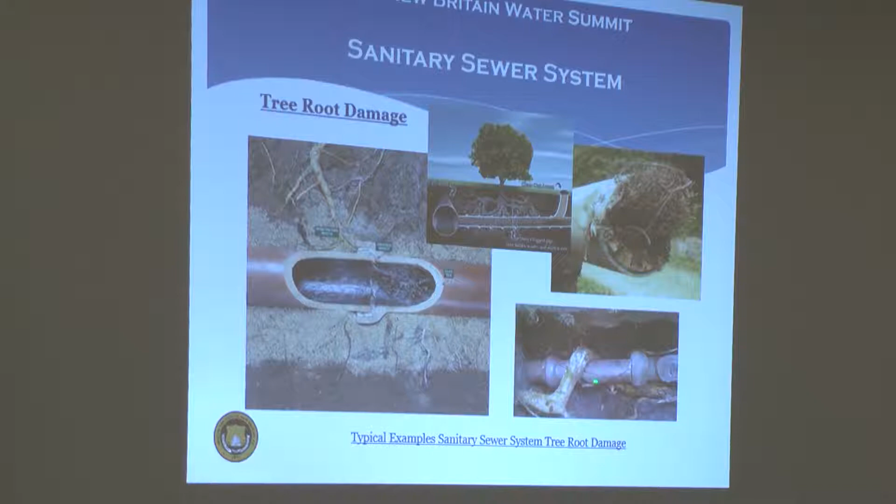One of the big problems you face with sewer systems is tree root damage. These are some examples of it - obviously roots want to find water. They need a source of water, and sewer pipes make for a good source of water. Unfortunately, when they get into a sewer system, they cause trouble - they can actually crush a sewer line, create a great place for debris to collect, and then block the sewer line. Like in this example, it happens constantly. And unfortunately, the sewers, when you have roots in them, it works in combination with other issues.

This is our safety valve plug - I was going to cover this on both the water and sewer side, but I just ran out of time. Basically, especially on the sewer side, sewer lateral insurance is pretty inexpensive - less than $100 - while a sewer or water repair could cost you $3,000 to $5,000. Especially in the sewers, it's a commonplace occurrence that roots get into your sewer lateral, which you're responsible for, and damage it. They could break it, and it's easy to clog behind these roots when they occur. So sewer lateral insurance is very important. That's all I'll say on that - it's not really an advertisement, just a smart suggestion for you.

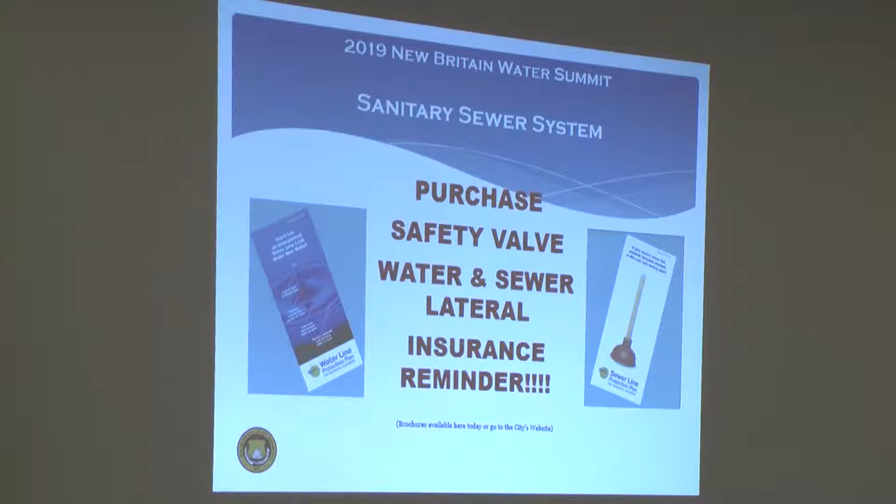The other problem with sewers, and like the mayor said, this isn't the glamorous part of our presentation by any means. But the roots not only cause damage themselves and could block a sewer line, but then fats, oils, and grease get in, say if you have a restaurant, even a homeowner. We've had big problems with just homeowners.

The roots in a sewer pipe, combined with fats, oil, and grease, give an opportunity for the fats, oils, and grease to collect and grab onto the tree roots. And it causes problems. I mean, it's really just cooking greases. We have a substantial FOG program in place. The FOG program that we have in place is primarily restaurant related, and facilities that have commercial kitchens.

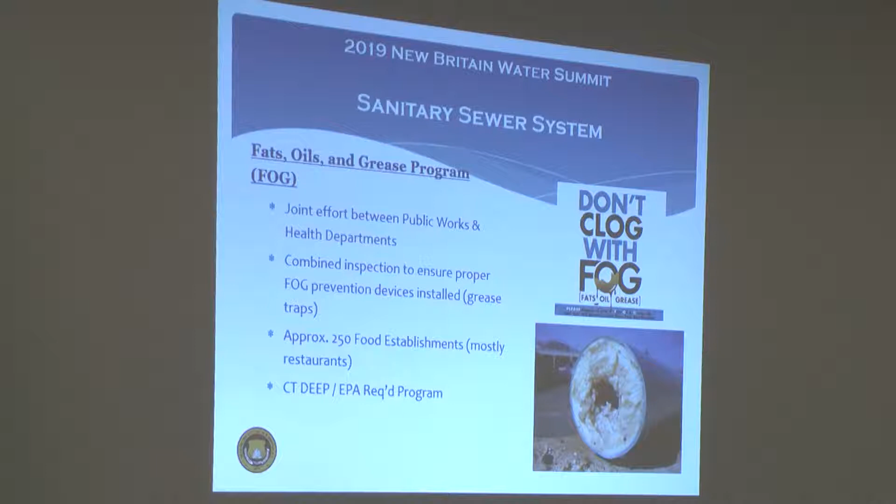It's a joint effort between the Public Works Department and the Health Department. We have about 250 food establishments, mostly restaurants. It's a DEEP and EPA required program, but it's also one of our big problems for sewer backups. When you see sewer backups that happen, a lot of times this is it.

For both those issues, the tree roots and the fats, oils, and greases, probably the most common thing we do with our sewer maintenance is jet rodding our sewer lines. So we go in there and we clear out the tree roots, or we clear out the fats, oils, and greases that accumulate. There are also some areas where you have a sewer line that's not at a very sharp slope, or we even have a couple little dips, so we also have to jet rod in those areas.

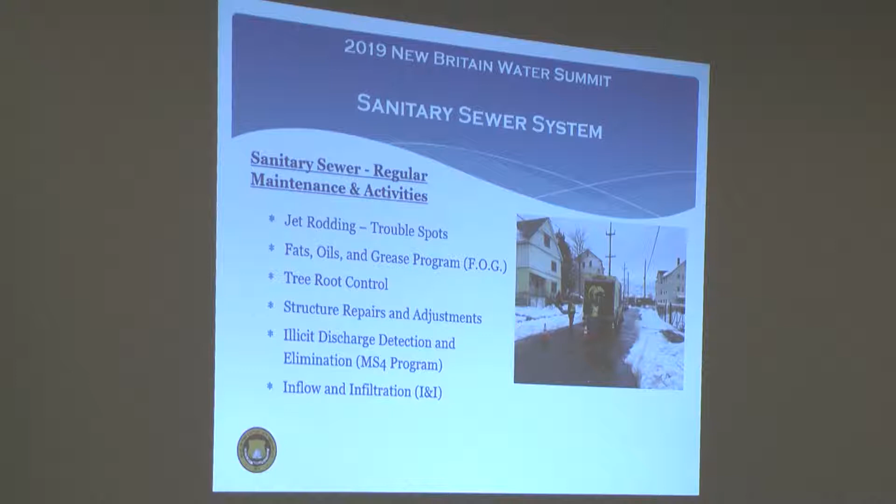But this maintenance goes on all the time, and depending upon the severity, if we know this is an area that's very prone to tree root damage, or we have FOG issues, we either jet rod quarterly or triannually. In some areas we might have to do a little bit more. For tree roots, we also will apply a chemical inhibitor to help with the issues.

There are a lot of things we have to do associated with this. We have to do wet weather testing, dry weather testing. Obviously, if you have flow in a storm sewer when it hasn't rained in a while, it's probably an indicator that there's something else connected to it that shouldn't be.

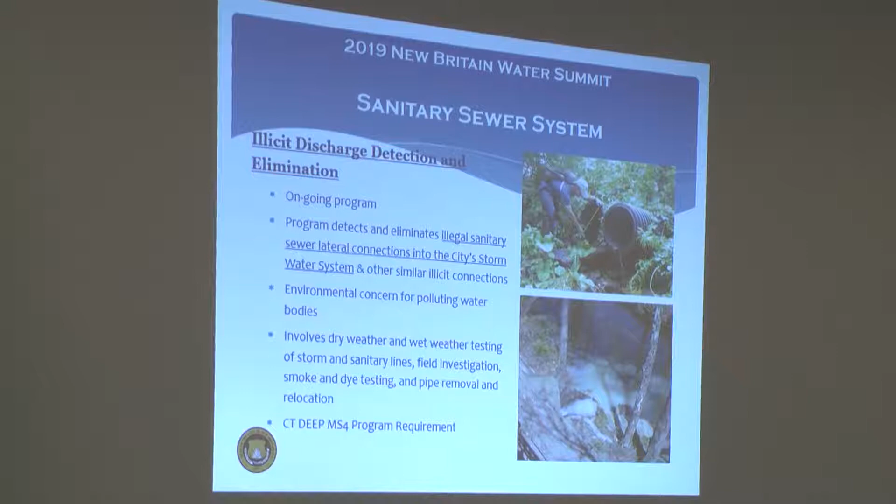The biggest issue, though, that we deal with, and this is something that Michelle Ryan is also going to talk about, is infiltration and inflow. It's a major environmental issue, and I'm going to get to some of that, but it's also a financial issue. The big thing about I&I is this. We have sewer lines that go down to the Mattabassett treatment plant. We have sewage flows of about 6 million gallons a day that come from our actual sewage use.

Well, we have about another 6 million gallons a day that just infiltrates into the sewer lines, both from laterals and mains. So as much as we produce in sewage, we also have clean water that gets routed down to the Mattabassett treatment plant that then needs to go through their plant and be treated unnecessarily. Environmentally, that's a big problem, and I'm going to get more into that.

So will Michelle. Fiscally, it's a problem for us also because we're billed based on our sewage flows. Our percentage of the flows to the plant determines the allotment of our annual bill, and half of that is clean water.

Infiltration, the most common thing people think about is this: especially with older sewer lines, clean water getting through an old joint. This is an indicator you might see. So we have a sewer line, there's a massive storm, and so much clean water gets into our sewer line during some of these really high peak storm events that it actually pops the top off of a manhole.

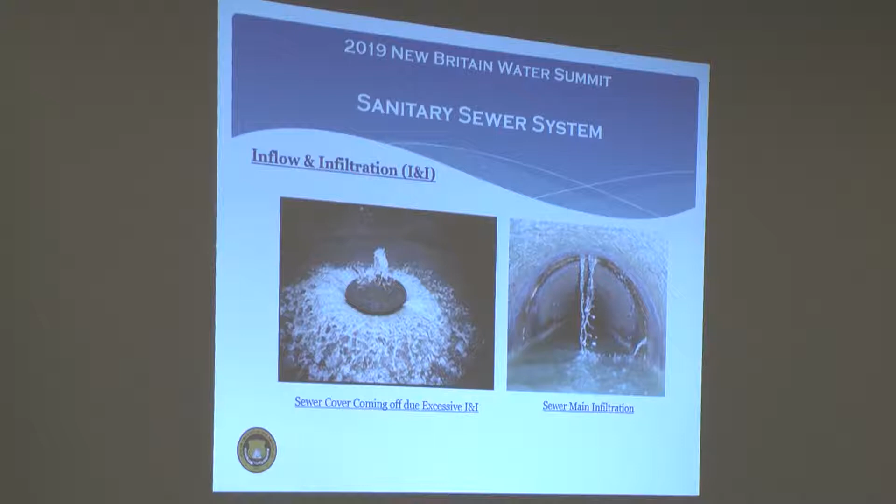It happens more and more regularly, unfortunately, with some of the weather trends that we're in. Well, this is actually estimated between 5 and 6, so it's a little inconsistent with one of my other slides. I got another slide. I'll probably talk to this a little bit more about how infiltration gets in. But this is the thing.

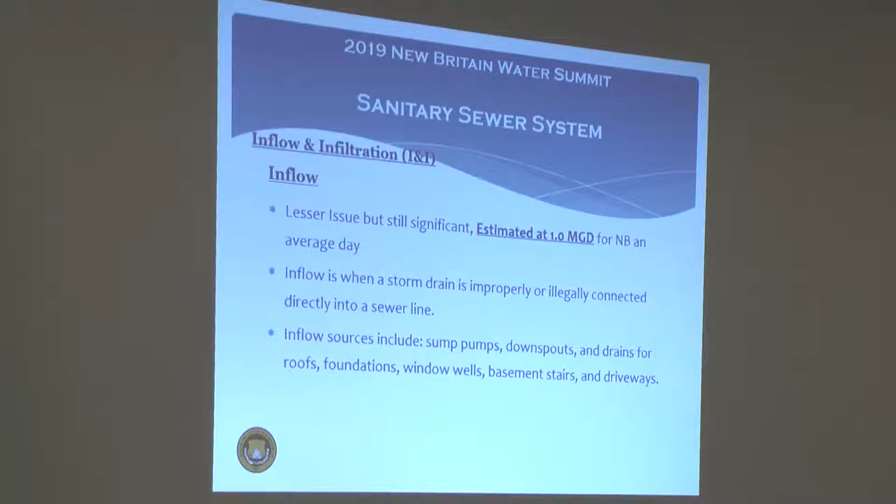Out of infiltration and inflow, infiltration is the bigger of the two components. Getting into the joints, getting into the pipes. Actually, that is estimated at 5 million gallons per day. And inflow is a smaller component, but it's still 1 million gallons a day. And that's more when people have like your roof leaders or things like that connected into the sewer system.

Getting into some of this, and this is something Michelle's going to talk about a lot more, and probably a little more in depth than me. But our average flow for 2018, which was up because it was such a wet year, 12.24 million gallons per day, 62.7% of Mattabassett's flow for last year. So, based on that, coming up into fiscal year 20, which starts July 19th, this is what our assessment is from Mattabassett going into next year, 55% of our budget. So anyways, 12.24, that's our average.

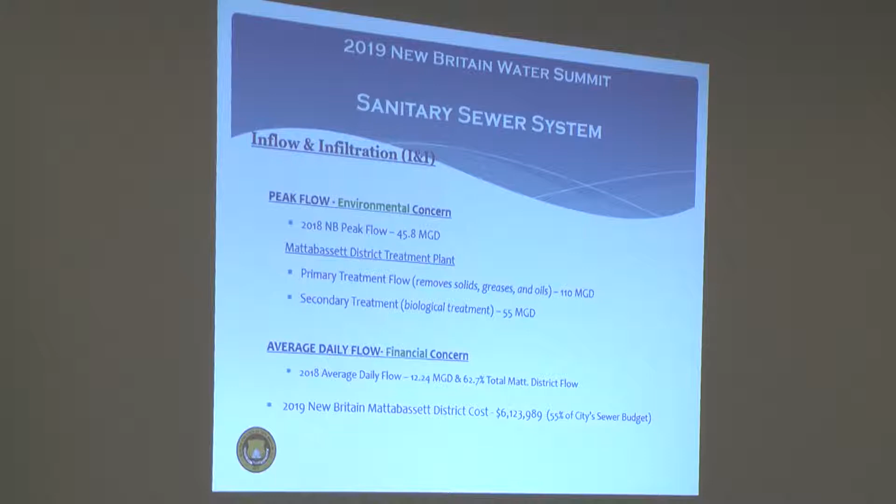And then again, just on the financial side, if we were able to reduce our flows, not only environmentally would we be sending non-polluted water back into the Connecticut River, but if our percentage of the flow came down, so would our costs. Let's see. What we do about it: Seb Pimenta from CEI is back there. He does a lot of this work. He's been doing it with the city forever. Unfortunately, this is a massive effort. We'll be doing this work long after I'm here. It's a continual thing. We have a big system, and this requires a massive investment.

We do flow meter testing in the sanitary sewer system. What you do is basically you try to figure out the areas where you have the worst inflow, and then, because it's everywhere, you want to at least spend your money as wisely as possible and figure out where you get the most bang for your buck on your investment. So a couple of years ago, for the second time, we did a complete study of this entire city and looked at our I&I issues, and now we're in the project phase again of implementing projects to reduce I&I.

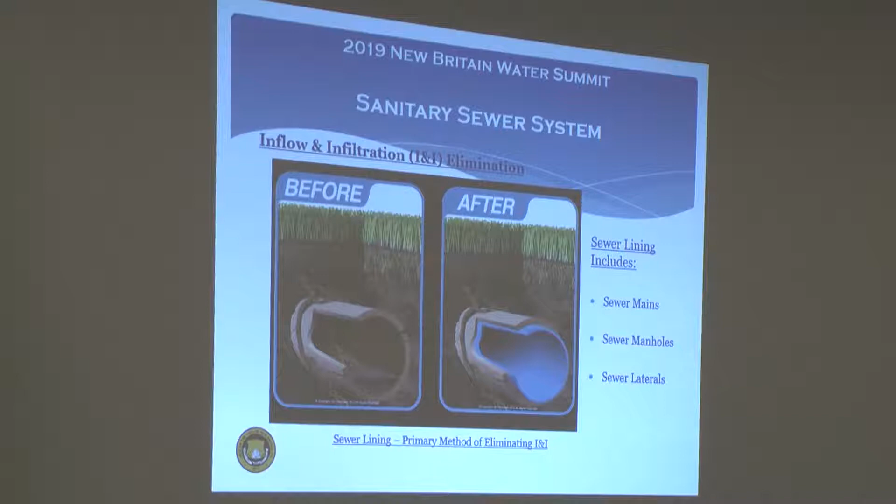Just basically a slide that shows some of the I&I. What you do for infiltration and inflow elimination is basically you line the sewer pipes. Basically put another pipe inside that pipe. Great thing about it is it doesn't just make it water tight, but also gives you a structural repair, because the pipes that are in the ground have by decades outlived their useful life. So this actually puts a strong pipe, a new pipe in the ground.

In addition to the other issues of improving the I&I, cured in place sewer lining is the process that we use. Just completed a large project in 2018, $2.5 million project. When the pipe gets inserted, it's actually a soft pipe that then gets inserted into the sewer line and gets cured in place to have a hard surface.

What we're doing now, because the city's been doing I&I work for a long time. We did a lot of work in the early 2000s, put about $12 million of work in initially, and we see minimal reduction of our actual I&I, okay? Because at that point in time, most of our work was just in the mains. And that was basically what we had to do at that point in time. There weren't the processes necessarily in place to chase down some of the I&I. So what we're looking at doing now is a more comprehensive process.

And the big thing that we didn't do is just like when Ray was looking at his water audit and half of the leak came from service laterals, same thing on the sewer side. He had 1.5 million gallons of leakage. We found only 400,000 of those actually existed in the water main. On this side, when we were lining the mains, which we did in the early 2000s, well, half of the infiltration to our systems actually comes in from the laterals from the houses, the smaller laterals, and we didn't have the ability at that point in time to really line the laterals.

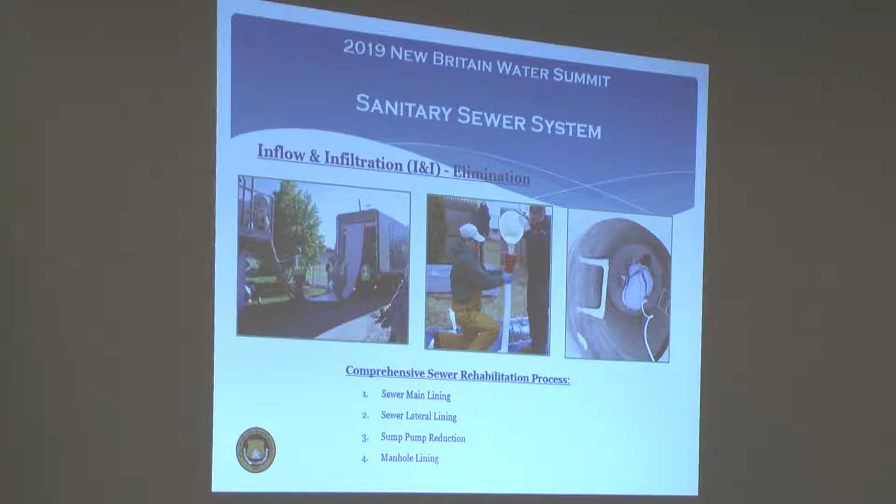So now we're going through projects right now. Sorry about that. Lateral lining is a much bigger portion. Manhole lining we have done. That's something we did do historically. Let's see. We have lined since 2000 28.15 miles, so about 16% of the system has been lined. We have to go back and do more work on the laterals.

And again, like Ray mentioned, sewer laterals are the responsibility of homeowners, but it's a pretty burdensome thing to put on the homeowners. So we're trying to figure out a way to improve these laterals without totally passing the complete cost onto the homeowners. And the way I look at it, because as public works director, I'm also involved with downtown projects. If we do a capital project on the street, we'll replace sidewalks. By ordinance, sidewalks are a person's responsibility. But when we're doing a capital project, we typically improve those too. So I kind of correlate it to this.

We're doing major capital investments in some of these areas and doing work that historically has been the responsibility of a homeowner. But we would be doing this work regardless. I mean, it's the right thing to do. There's a cost benefit, there's environmental benefit, but we're also under consent order to do this work.

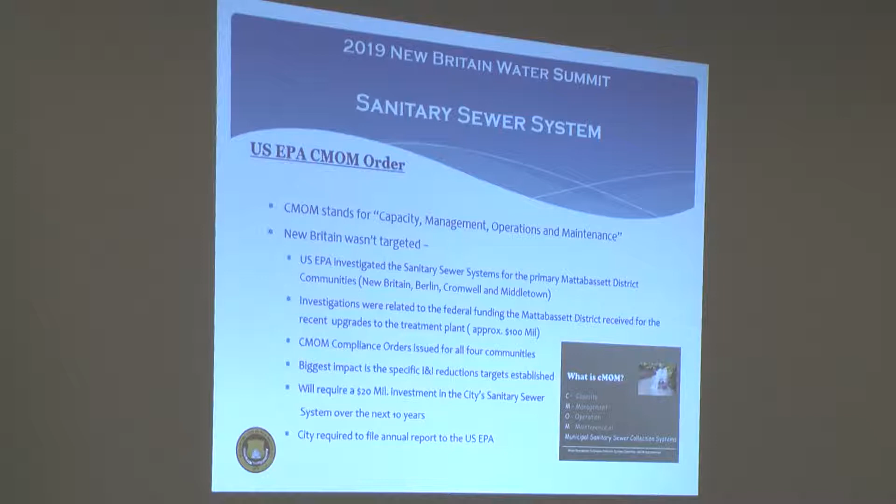As far as our sewer rates, similar to Ray, it's too bad when Ray was showing the water rates, it was hard to see. I was sitting pretty close, and you really couldn't appreciate it, but the water rates are about half of what a lot of MDC communities, other communities are. You probably couldn't see that from even the middle rows and the back row.

And the sewer side isn't quite like that, but despite doing all this work, despite being the largest community that's helping fund a $100 million treatment plant upgrade, or that's money that we're putting into our sewer system. Rate-wise, MDC's got 8 towns, very similar towns, East Hartford, Meriden, similar sized town. Manchester, who is actually not that much less than us on the water side, but they were less than us, they're more expensive than us on the sewer side. So at $4.30 for 100 cubic feet, we're still competitive and actually on the lower side even on sewer.

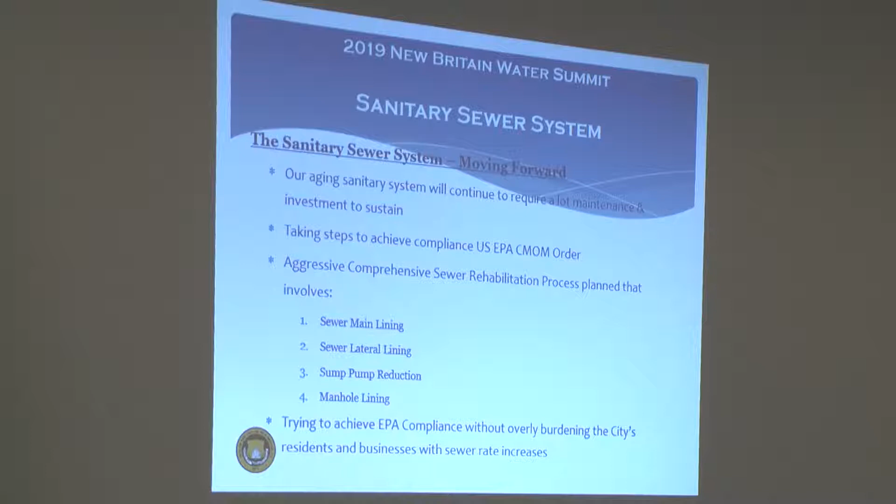Moving forward, kind of hit on all of it, but actually this I&I issue we have to address with our sewer system, that's going to be the primary thing that we're working on for years to come. It's a large city. We did 28 miles, that's a dent, but we have a long way to go. But we take it seriously, and we're serious about meeting our EPA compliance requirements.

When you're tracking down those illegal connections where sewer got into the storm system and there's cloudy water coming in, to actually determine where those are, there's 123 different outfalls we have to investigate. A lot of those are in the middle of the woods and brush. It's a difficult task just to do that. 154 miles of stormwater pipe, almost 5,000 catch basins around the city that we're charged with cleaning, almost 3,000 manholes. There's 55 miles of streams and brooks.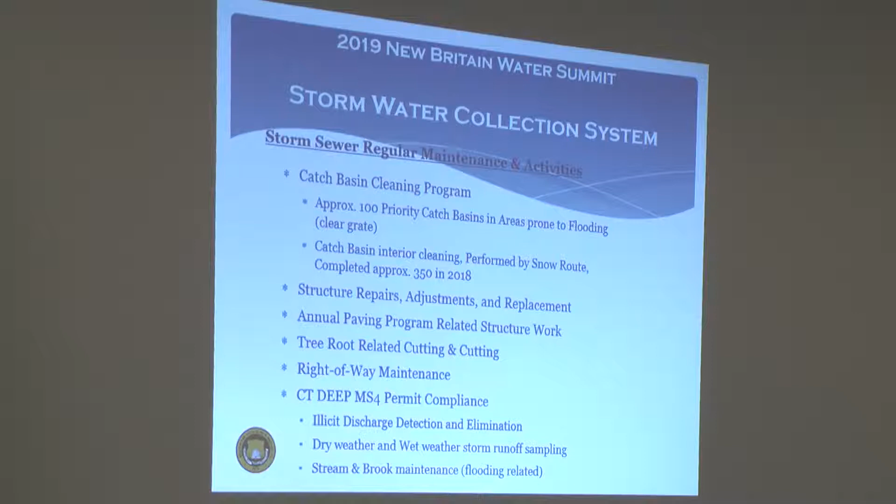Something we're seeing more and more lately is flooding issues. This year is probably one of the worst years, one of the wettest years on record.

An important thing about the stormwater system, and I think Ray talked a little bit about design storms, is that our stormwater system is designed for a 10-year storm. That's common; Connecticut Department of Transportation's stormwater system is also designed for 10-year storms. You'd think that's sufficient for most cases, but now we're seeing more and more storms that exceed this. We're seeing 100-year storms happening very frequently, so even by design, our systems can't accommodate storms that are happening pretty regularly.

Some of the older cities, like New Britain, had a lot of building happen prior to people thinking about these things. They were built out before people considered the amount of flooding or the amount of impervious area being contributed. So when it rains, everything flows.

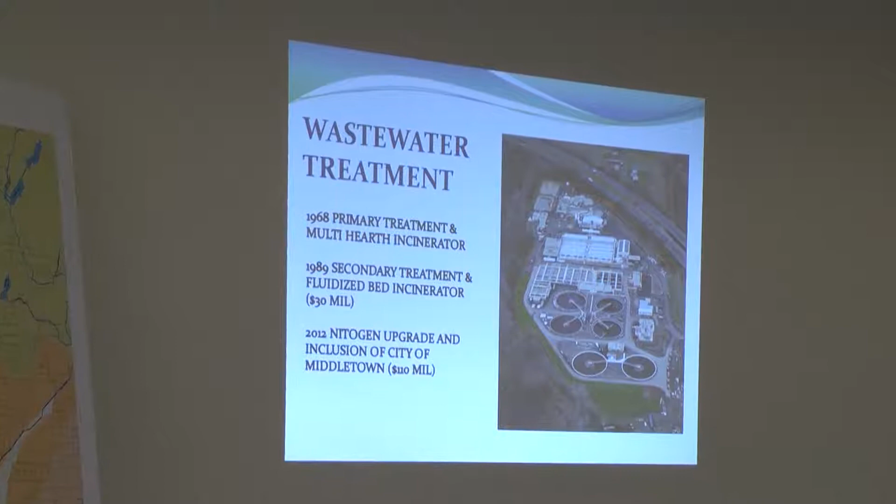We built a multiple hearth incinerator as well. Then in 1989, we upgraded to a secondary treatment system and also included a fluidized bed incinerator. In 2012, more recently, we did another nitrogen upgrade and also included the City of Middletown. Back in 1989, we upgraded at a cost of $30 million, and in 2012, $110 million.

One thing I want to point out about these upgrades is that we are mandated by EPA, and regulations come up with new standards with respect to wastewater treatment.

The member towns of Mattabassett include the city of New Britain, Berlin, Middletown, Cromwell, and a portion of MDC and Farmington. And the district, the Mattabassett District Pollution Control Plant, is located in Cromwell.

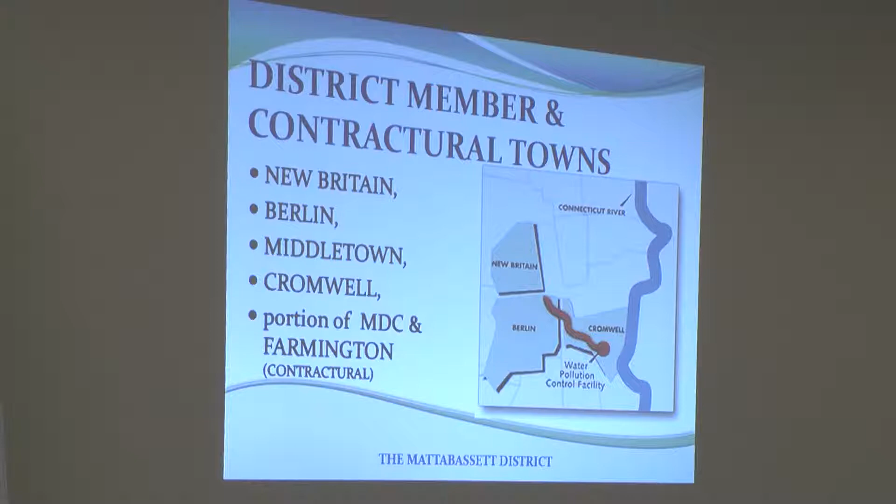The design of the Mattabassett District is basically twofold. We've got primary treatment and secondary treatment. Now, the primary treatment, we can treat up to 35 million gallons per day on average and 110 peak flow. And the secondary, only 55 million gallons per day. So anything that we have during wet weather events, anything beyond 55 million gallons per day, is considered a sewage bypass for us and a violation of our discharge permit. This is why it's very important the communities have I&I projects in their member towns.

New Britain flows. New Britain accounts for approximately 62% of the community flows, and the reserve capacity for New Britain is 46 MGD peak flow with 22.5 MGD secondary flow. So as you can see, if we can only fit 55 through the secondary, New Britain is actually allocated for 22.5. The rest of it has to be divided by the other member towns.

The district's budget: New Britain's contribution makes up 40% of the district's budget, and it also makes up 51% of all the assessments of all the member towns. So in July, we're looking at, for the city of New Britain, $6.1 million in assessment.

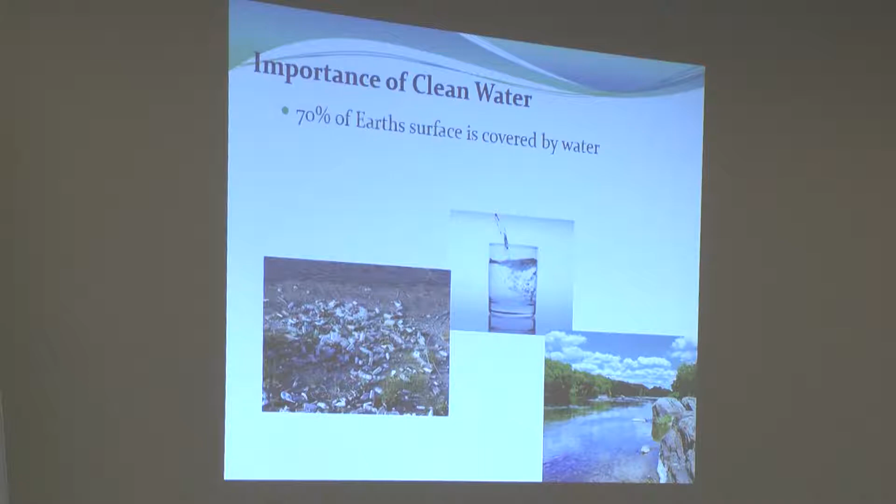So why is wastewater treatment important? Oops, let me just go back here. So it's important because we know that 70% of the Earth's surface is covered by water, but less than 1% is actually usable, especially for human use. So we know that it's very important for public health and the environment. So what's been done over the many years that we've been treating wastewater according to the requirements of the EPA and the regulatory standards? We know that we've eliminated a lot of death and illness, reduced cholera, hepatitis, and typhoid diseases. So it's a good thing.

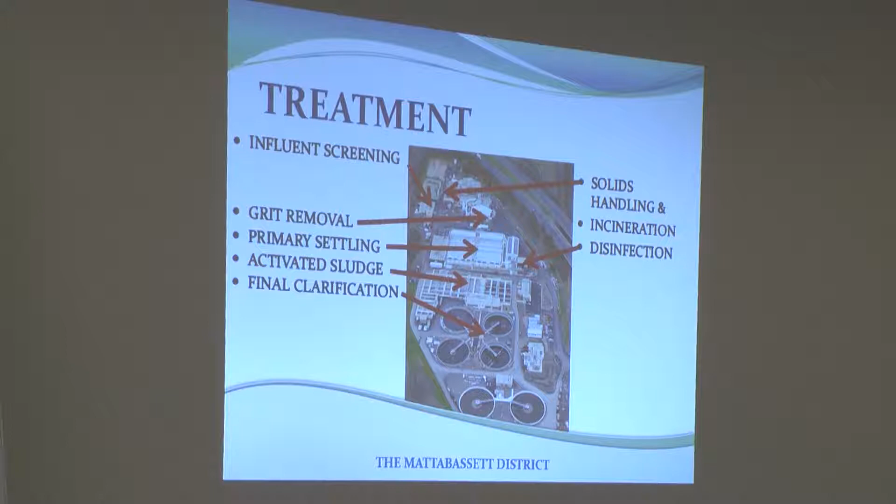Okay, the treatment. Here's a picture of the Mattabassett, and I pointed out several different processes that take place throughout the plant. We have influent screening, grit removal, primary settling, activated sludge, final clarification. We have disinfection, solids handling, and incineration. So the activated sludge and the final clarification is basically the secondary treatment. And that's where it all takes place on site. In 2012, we did a nitrogen upgrade, and the additional facilities that we put in included odor control, an underground storage tank for diesel fuel, emergency generators, and we have a septage and sludge handling facility.

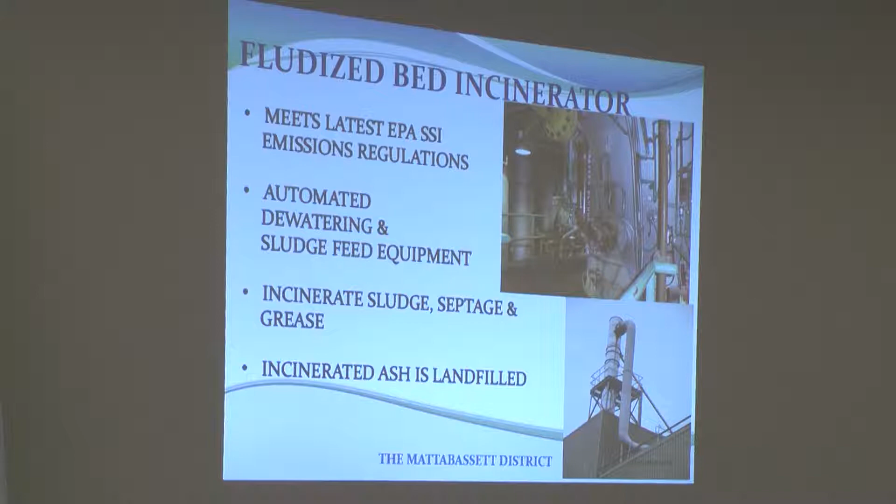These are pictures of our new incinerator. We put this in in 2012. It was a lot of work. It had to meet the newest emission requirements by EPA. Once we installed it, it actually took several years thereafter to operate it in a way where we can meet the emission limits. So our operators did a very good job doing that. The equipment includes automated dewatering and sludge feed equipment. We incinerate sludge, septage, and grease in this unit, and once we incinerate the material, we landfill it.

We also put in energy efficiency projects that help us reduce the cost of our electrical bill, which is really what drives the wastewater treatment process. We put in 60 kilowatt solar panels. We put in new efficient aeration blowers, waste heat recovery from the fluidized bed incinerator. We're actually taking heat from the incinerator and heating one of our buildings with it. So it has helped in the cost of the operation.

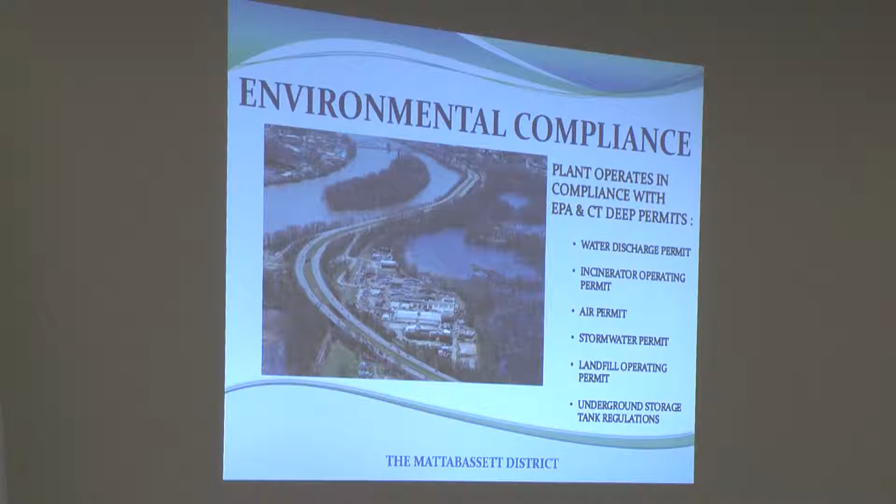We also have a lot to do with environmental compliance. We have a lot of EPA and Connecticut DEP permits that we're constantly complying with. We have a water discharge permit, an incinerator operating permit. We have a general air permit for all our combustion units. We have a stormwater permit, a landfill operating permit, and we also have regulations we have to comply with with respect to underground storage tanks.

The Mattabassett District makes up 6 administration staff, 16 operations staff, 9 maintenance staff, and 2 laboratory staff.

We also have to comply with worker safety. We have a lot of OSHA requirements that our workers have to comply with, and then we also have environmental health and safety programs that we have to comply with as well.

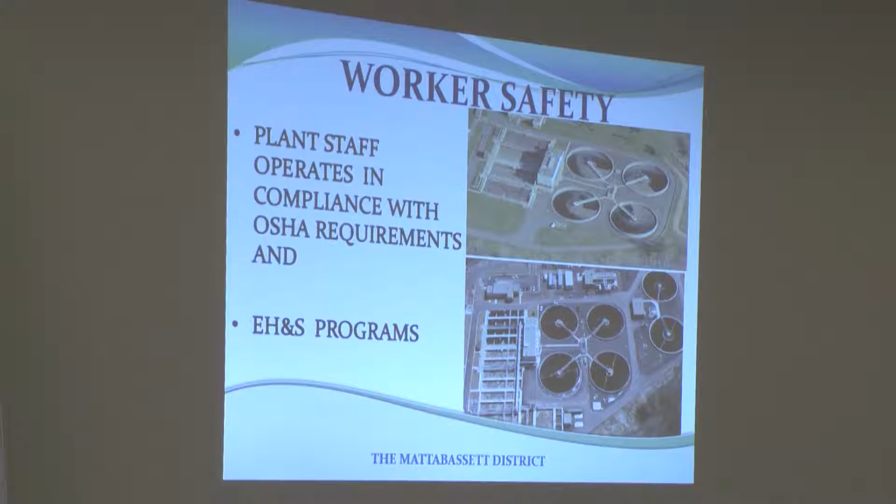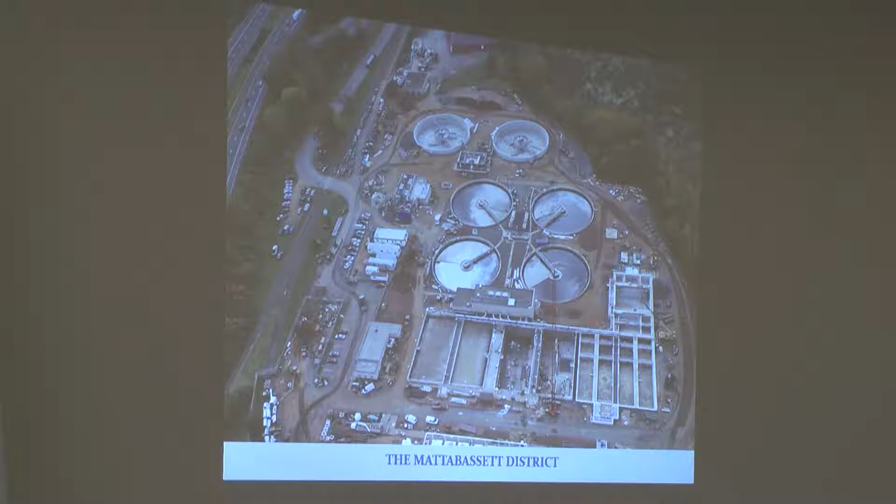This is one of the pictures that we took. Oh good, these 2 new tanks went in in 2012. And the interesting thing about this picture is that the contractor had to actually build these facilities while maintaining operations at the plant. So that was pretty challenging, but it worked pretty well. Other than that, Mattabassett's been providing water treatment for 50 years, and we hope to do it for another 50. Thank you.

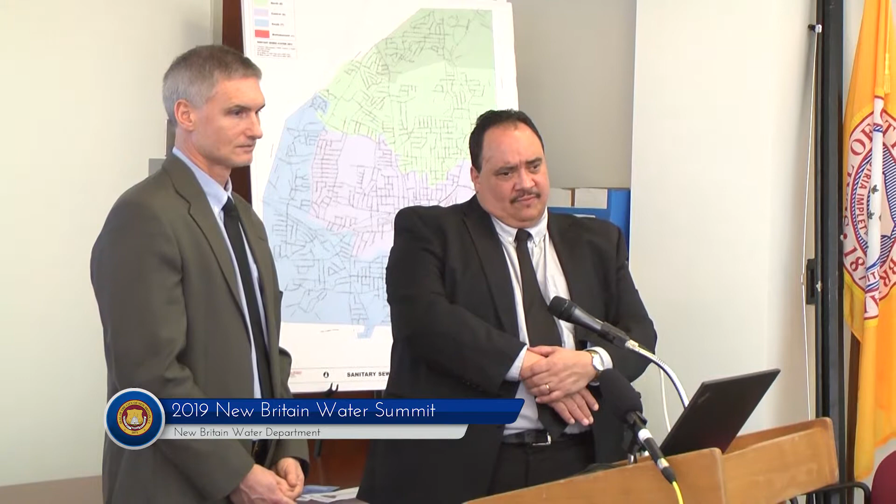I think its deepest parts are about 35. There was a comment made about adding more capacity to store water. Has the reservoir ever been dredged? Not to my knowledge. It's one of the things we're looking at, but it is really, really, really expensive.

That's a huge reservoir, a large surface area, and to go down there and dredge it, it's going to take quite an effort. Could any of the 7 reservoirs be expanded in any manner?

I would love to expand Whigville, but it would be, again, a monumental task. The permitting process alone, the environmental impact, all this would be studied. As I mentioned earlier, Whigville seems to be like a thimble in a blanket.

It's got a huge watershed, but it's very small holding. It only holds 57 million gallons. I've seen that place go from dry to full in a good rainstorm. It's incredible. If I had my druthers and could do it, that would be the one I would work on.

How would you increase the capacity of Patton Brook well? I'd probably get better pumps, re-drill the well. I have the rights to the area, and see where we can. That is a good aquifer, but more importantly than the aquifer, the capacity of that, is upgrading that facility.

It's got some great water quality because it can be used directly as a feed, a potable source. The problem for us is it's too far away from our distribution system. It was used as a raw water source. I'd have to run, I think, a 4 or 5 mile line just to get it to our distribution system, and at $100 a foot, we're talking a lot of money.